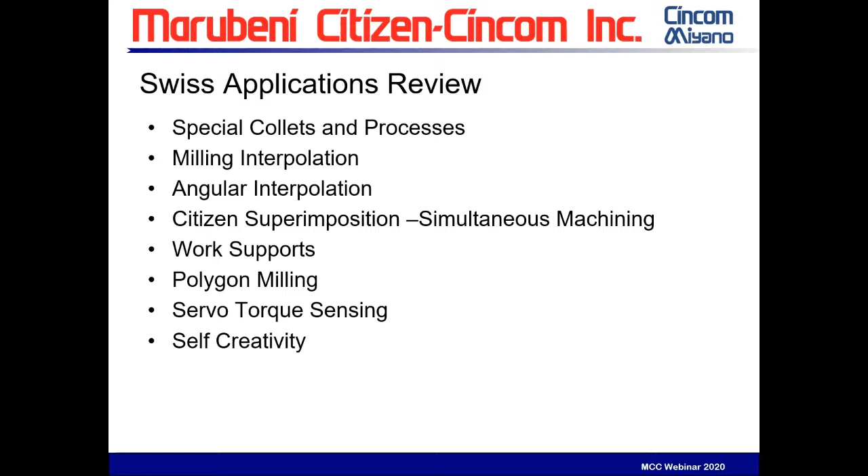As this slide loads at the beginning of this presentation, I'd like to explain a little bit of background. I'm dating myself and us, but many years ago we were asked to put together an advanced applications presentation, and you could look at it many different ways. Deep programming, deep macro things, and really advanced applications is not just the G code of the programming of how to get there. It's more so the idea of what you want to do.

An interesting statement that makes this a very powerful presentation for me, and hopefully for you, is we gave a presentation up in Productivity, Minnesota, our dealer in Minnesota. It went over well, and it was basically this presentation. This has a little bit more and a little bit less, and it's been changed over the years, but it's basically the same presentation. And all went well.

I visited some customers in Nebraska maybe 8 months later, and the shop owner actually said, 'Hey, great to see you. Thanks so much for training our staff. When they came back from your training, we saw a 15% improvement of parts going through the shop within 2 weeks of them coming back.'

And we talked and explained, 'Hey, that's fantastic. That's great to hear. But I didn't do any training in Nebraska. So whoever should get the credit, I want to spread the credit. And it wasn't me.' And they said, 'Well, they came up to Productivity and they saw a 2-hour event that really is a lecture, a presentation. After they saw this event, they went back to their shop and maybe they didn't even do some of these things, maybe they did, but it gave them a new perspective, a way to look at what are we doing and what might we do.'

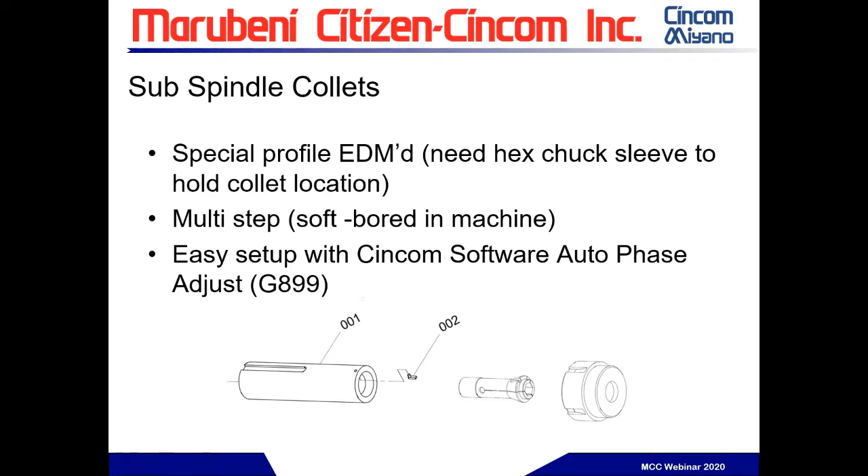So it's called phasing or phase 0. We have easy methods with our Cincom control to do that, where others have to fight and change parameters to find their zero location.

Let's look at one of these. Here's a part we had to do a long time ago. As you can see, it looks very tool-like, like a 3/8 ratchet for the auto industry or tools industry. This design was high carbon steel, and it had to be heat treated. We really needed cycle time for high production.

We could not take the standard Swiss approach of mill, index, mill, index, mill. We had to pound this through. So we knew the only way to get the cycle time down was to use a very large set of saws, and we straddle sawed. We have two saws with spacers, and we just pound across this, index once, and come across again.

We have two sides to do this on, so we're trying to figure out where we're going to hold this. We elected to say that this is the guide bushing side, or the front side of the part, and this would be the back. But now if you were to hold and make a collet to hold this, it's odd - in one direction it will hold very rigid, but in the other direction it's going to want to tip or tilt as we put pressure on it.

So really simple - instead of just ordering this collet real quick, think about it a little. We did a counter bore in the collet also, and now when the part fits, we don't only have it held by the flat, we have that little bit of the turned portion held too. We were actually able to pound these saws, and this part was something like 52 seconds. We were under a minute, and that was our goal, and we hit it. This was the first good start of advanced applications - look at your collets and make sure you design them to the best of the cutting principles you're going to use.

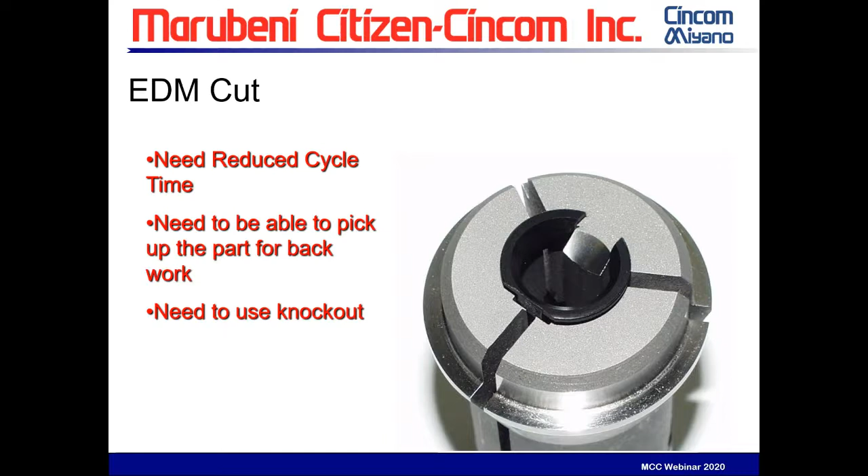Then when we were all done, it was kind of an afterthought - you don't always think of these things, but a reminder to you, somehow you've got to knock the thing out. So it probably took us another hour or two to whittle out a knockout device. Now you can see the knockout is relieved for the edge of the collet, and here the part comes out. Beautiful part, beautiful concept, and yes, we did get the order. Our competitor ran parts that weren't perfect, with little burrs. We waited our week and ran a good part.

So, creative ideas in collets. And then for the ones I think we've all seen - some of the specials and just special shapes. Here's a special shape collet. Remember how easy this is - if we run this part in our spindle and stop, manually bring this collet over the part and execute this G code, or on today's machines, push a button in preparation, this location is known, and now we have a very easy way to pick up this part too, through strong Citizen-Cincom software.

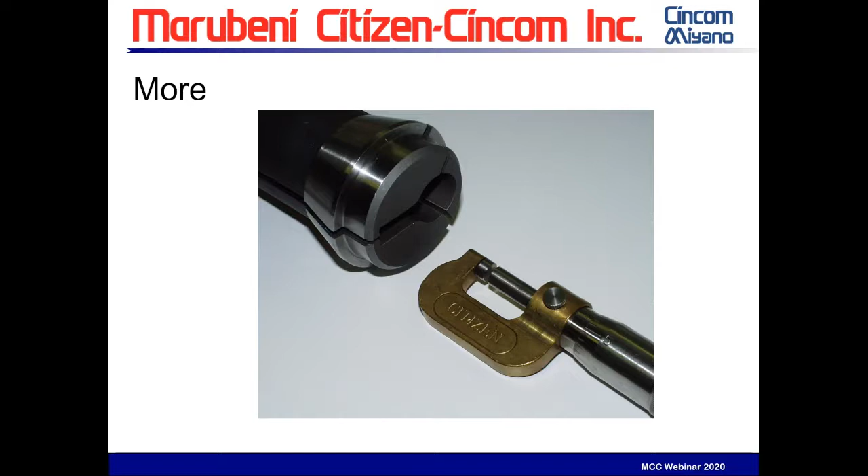One more simple example in the Swiss world, less used, is the half hard or soft collets that you can bore yourself. These are critical for quick running parts. If you're going to run production, you should have somebody make it hard. But here's a 3/16 stainless part that any time we tried to machine it, it acted like a bell and vibrated. So we made our collet with 2 diameters, hitting here and here, and it picked up perfectly, ran all day, all week, all month. It was a beautiful setup. So simple things with collets.

Now let's look at the next level of collet. Here's a part we did - I whittled this out for a show at IMTS, I think 2008. We instantly got 2 or 3 machine orders after this. Actually last week our support manager reviewed a project where the customer has a part that looks almost exactly like this - different, but similar. Everybody wants to do eccentric turning, eccentric threading, eccentric everything, and that adds cycle time and use of the machine. The machinery is really moving all over the place.

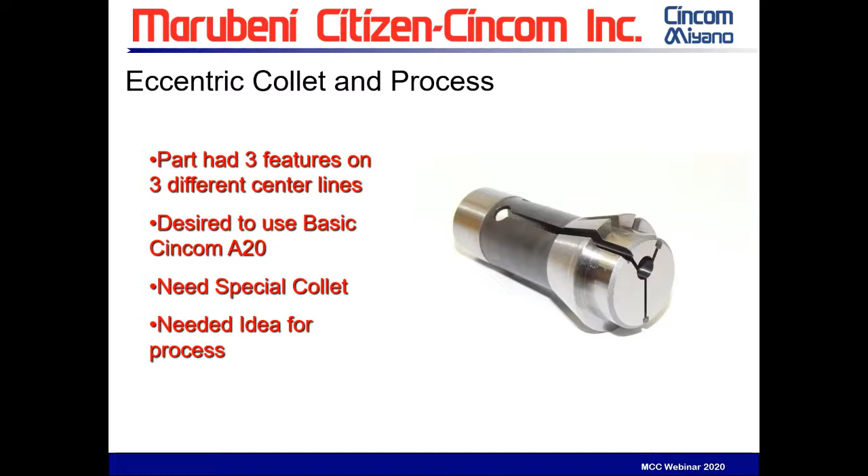If we look at it, we have a collet made - Southwick was our friend here, and they made this. Of course we have the slot for the chuck sleeve again, so it's an eccentric collet. Now the problem is, how are you going to pick this up? We can't spin this. So this is the part of creativity. There's the part installed in the collet.

Again, but now we've learned a lot, and we know when we do special stuff like this, we have to also figure out how to eject it. For some of you that don't know, this is what we call a standard option - it's an option, but all our machines have it and it's available. It's a spring-loaded knockout device really designed for parts with holes in them so the chips don't go through - it's called a through-hole workpiece knockout device. If we change the end to be an eccentric knockout, it lines up right with the eccentric. Piece of cake, easy to make, and the ejection for this part was easy.

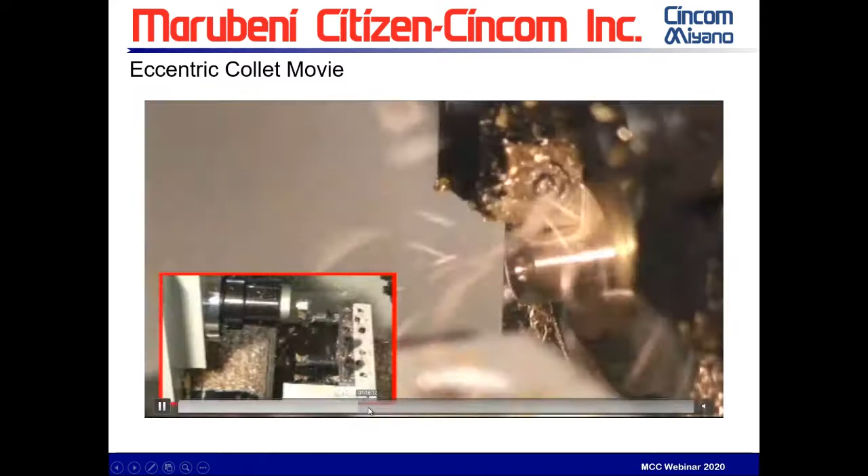Now here we're going to look at the application - I'm not going to run the whole video, we're going to jump forward to the start. It happens to be brass, but here you can see we already have it picked up and the part is running in its eccentric. So as the front's running, the back's running. Now we have plenty of time - there's a lot to take off with this eccentric. I'm just going to jump ahead and get to the good stuff.

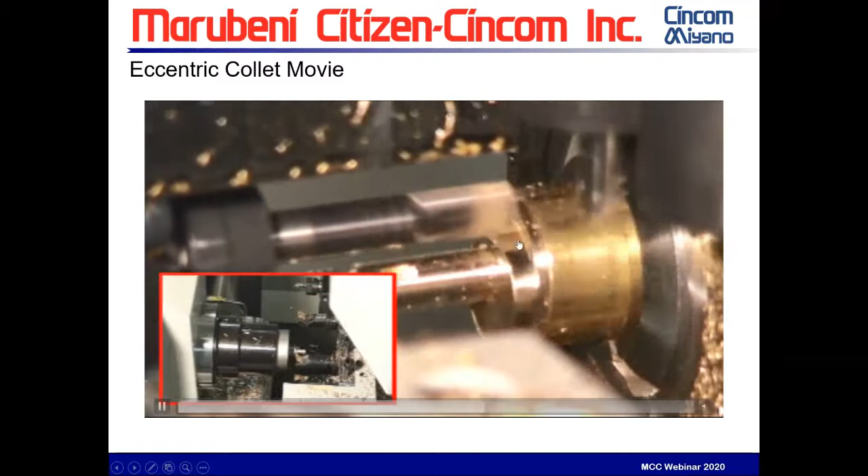This would be the 2nd center line. So the first part we're running on normal center. We're milling the 2nd center line with milling interpolation, which we'll cover in a minute. Then we go and finish the rest of the part. What's interesting is how are we going to pick this up? This is on center, and if you remember, the collet is offset, so we can't spin this.

Well, try to think outside the box. Just how can we get this part? We do have an x-axis on our subspindle, so if I can stop this properly, here's what we're going to do - again this is on center. We're going to pre-cut off to a number that you determine - might be 80 thousandths, might be 60 thousandths - enough that's going to hold the part here, but it's almost ready to fall off.

What we can't see on the left here is the subspindle collet. If we stop and lock the C-axis and bring it in line with the X-axis, and now bring that off-center collet on center, but not spinning, we feed it over the part. Then all we do is close the collet, turn on the spindle, and we'll actually just twist the part off. I'm going to run it now so you can see.

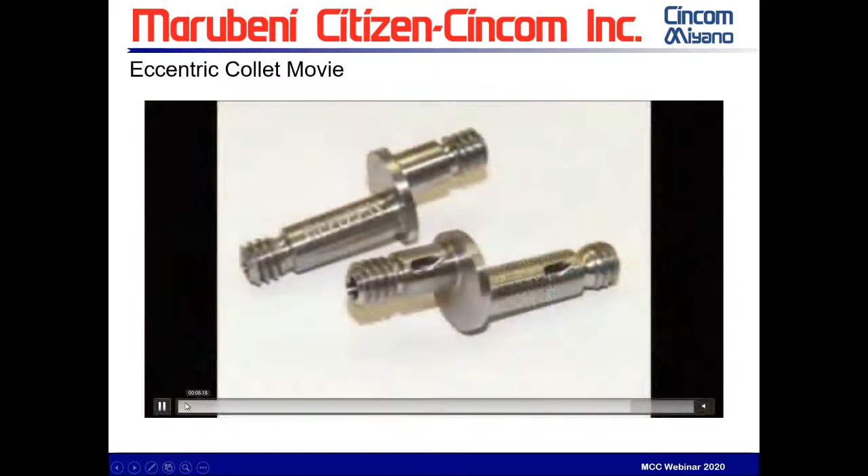So in this case, we pre-cut off, then just twist the part off. Now we have the part held, and we have the ability to go machine the second side, turning and threading and grooving, without needing eccentric turning. Very simple thing, thinking outside the box.

If we look at even our fixed head versions, our Miyanos, our BNJ, our BNA series, MSY, anything where the subspindle moves in X, we can do this same thing, and we do it. So let's look at one more.

Here's another project we had that's a creative part. It's in the medical field. It happened to be a toe implant. We made it very large for a show and changed it around, so it's kind of like a horse toe implant. But just as an example, what this has is a bend to the part. So from the center line of this feature to the center line of this other feature is a 6-degree bend.

Again, this customer's concept was, I don't want your high-end machine, I need to run a lot of these for the best value. So we looked at the A20. Now you're starting to get the idea.

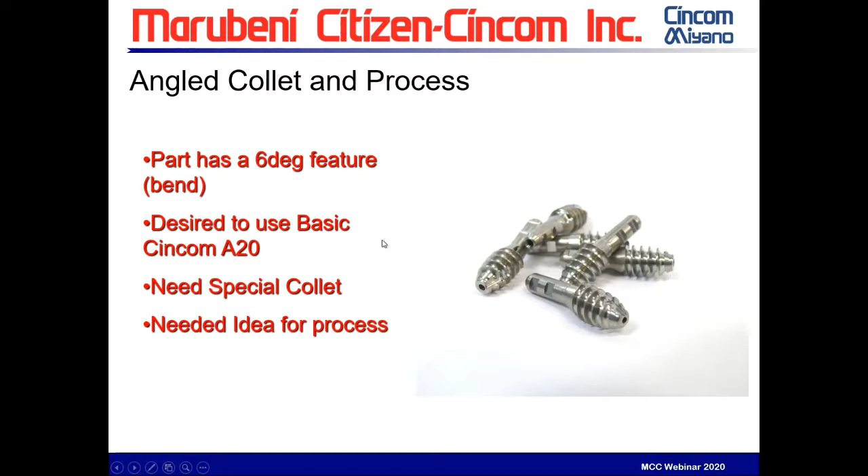Let's just throw a collet in there. But wait a minute, this is angled. So are we going to bend this? The first thing we do is this bore is not a bore - it's going to be like a sinker EDM, and I'll go drastic here - but this bore is cut at the 6-degree angle.

Now, how are we going to get this part in there at a 6-degree angle? Are we going to mill it? Well, now we've lost all our cycle time. So we need a good idea, open mind, and be thinking. Get creative, and we'll get this going here.

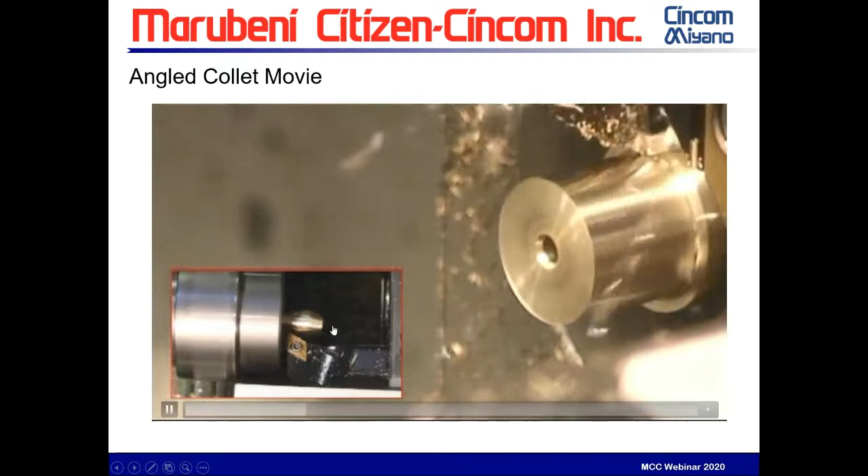Here the back is running from the 6-degree angle, and it's taking its time to turn. The front's just working away. Let's get this going here. So, thinking outside the box like we always want to do, let's watch this process.

As we complete the front of the part, we do that pre-cutoff. But after the pre-cutoff, we're actually going to bend the part. Now, once that part is bent - if you saw it - after the part was bent, we rotated it 90 degrees so it's in line with the subspindle X-axis.

And now we can take our collet that is already at that 6-degree bore, and we'll have to enter our subspindle in X and Z at a 6-degree angle. We're going to close the collet, rip it off, and go machine. If you saw it move a little, what's interesting is it's going to pull it to the collet. So as much as you saw it move a little, it repeats very, very well - I can't say perfectly, but very, very well.

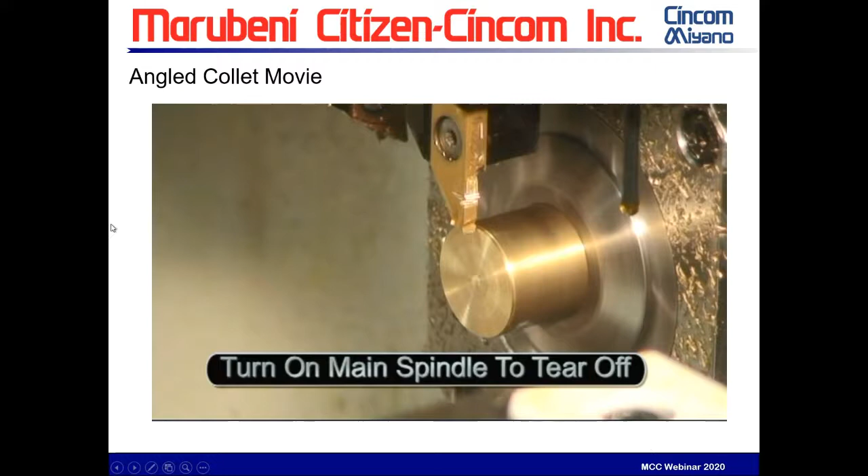We had a customer have a similar project after seeing some of this locally in Illinois - different part, but similar - and they ran to a very tight tolerance, and they were able to do it. So often it's just the idea to see it. Some people just hadn't thought that this was possible - picking up an angled part and having a bent part in the machine.

So that's a review of collets. Hopefully it opens your mind to some of these techniques. Now we're going to go into some other techniques, milling interpolation. I believe most of you have seen or heard of this, so I'm going to do a quick overview.

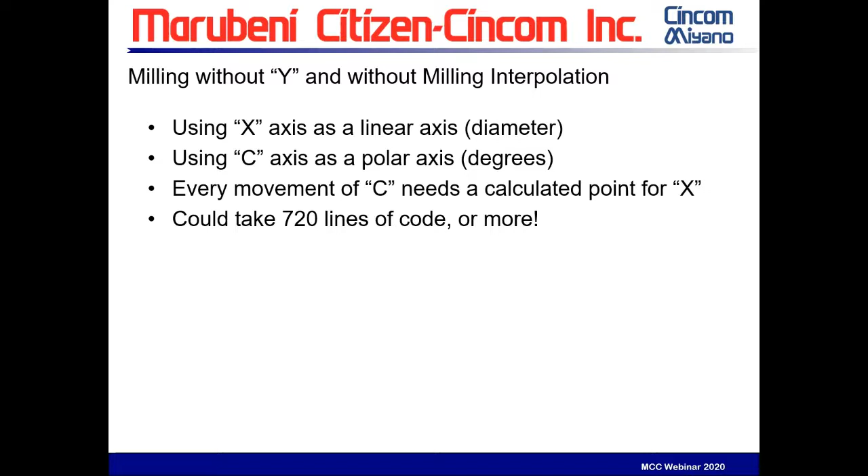Basically, we have an X-axis and we have a C-axis, and it's difficult to program in the polar world. So when we have a real axis X and a real axis C, and we want to do blended moves, it's all math. Our high school training is our friend - pi times diameter gives us the circumference and we come up with numbers. Kind of difficult. Many years ago, we used to have to do this - we would have 720 lines of code for this little shape we're doing.

Then it's awful, and you want cutter compensation, so you have to reprogram the code.

With milling interpolation, a function we've had standard in machines since the 90s, we make a virtual axis. We do a G code and it turns this function into pretending we're on a milling machine. We program a virtual axis up and down as if it's not on the Swiss lathe, and we program the mill going around. In reality, it does C-axis and X-axis moves, and we're able to get complex shapes in an easy to program method.

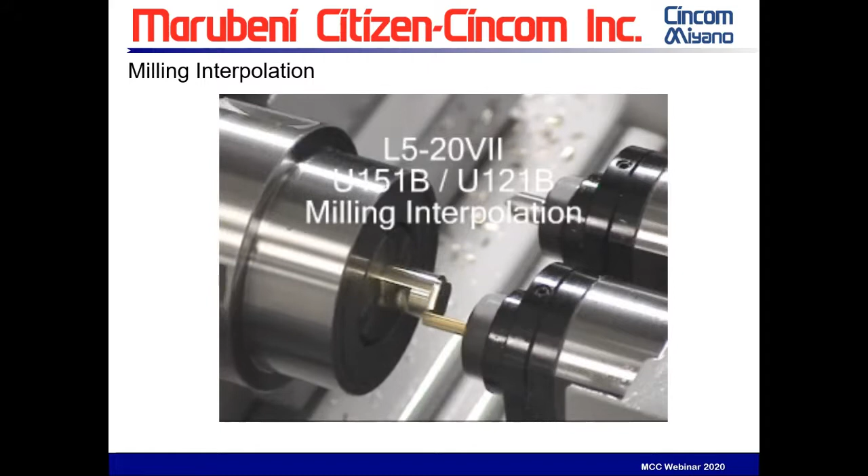This is more common today, so I'll go quicker. But basically, for those new to this, if we just take a G code and call it to turn this function on, from there we're programming in the real world of X and Y, just as if we were on a milling machine. So you just saw a square being cut. Here's an X150 and a Y150 and an X150 and a Y. Very straightforward programming - maybe 6-8 lines of code where, 20 years ago, this would have to be 720 lines of code. So milling interpolation is our friend. It's a great way, if you don't have a Y-axis, to get some shapes going. Basically all you need is a C-axis and a live face tool, and we can do milling interpolation.

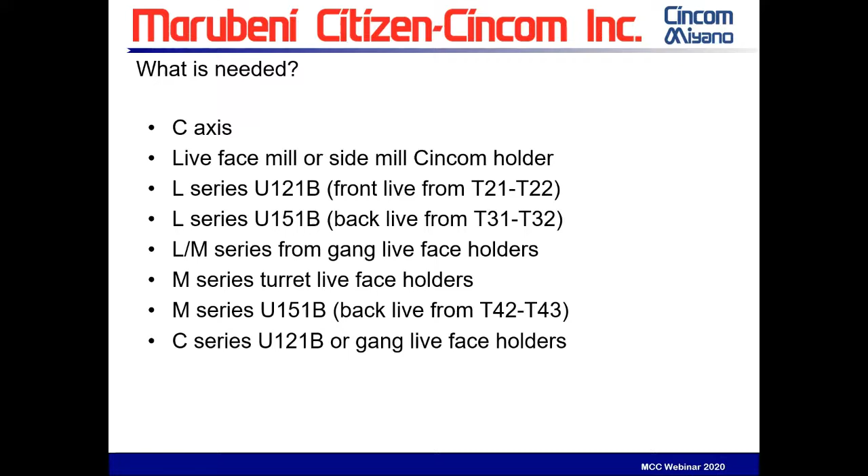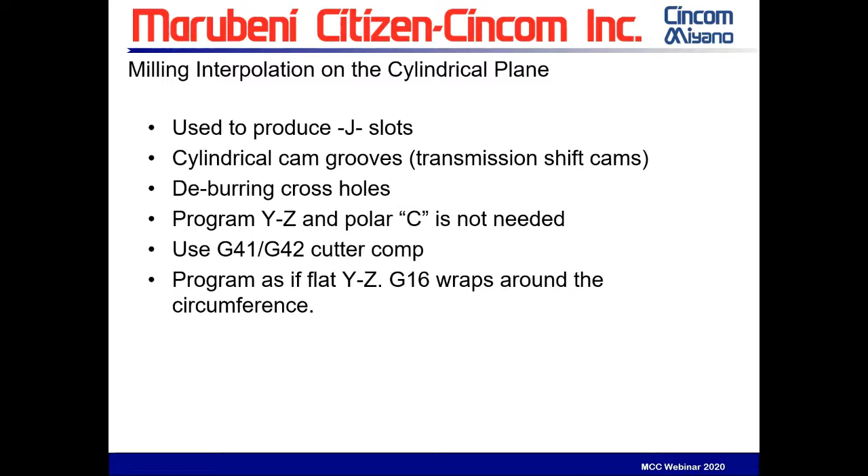But what's more interesting, added on to milling interpolation, is another plane called the cylindrical plane. A lot of our customers and users maybe know about it, but a lot don't. This really opens eyes for operators and programmers that simply have a cross hole. When we chamfer a cross hole, there's always a very large side of the chamfer and a little short side, because we're plunging in X and there's a cylinder. So we can basically evenly chamfer all the way around the part utilizing the cylindrical plane. And often our customers have some kind of J slot or cylindrical cam grooves.

I always say a video and a picture does a thousand words, so let's look at this one. In this case just simulation, but here's a simple cam groove - I think we've all seen them, some of us have machined them. But when we run something like this, it could be a tight tolerance.

If we start sharpening our end mill and putting in different end mills, we don't want to reprogram. So all of this will work with tool nose radius compensation, and we just change an offset for the radius value. Very easy to program, very easy to utilize. There's an even chamfer all the way around the cross hole. Many people would say, boy, that looks like it's probably really hard to program.

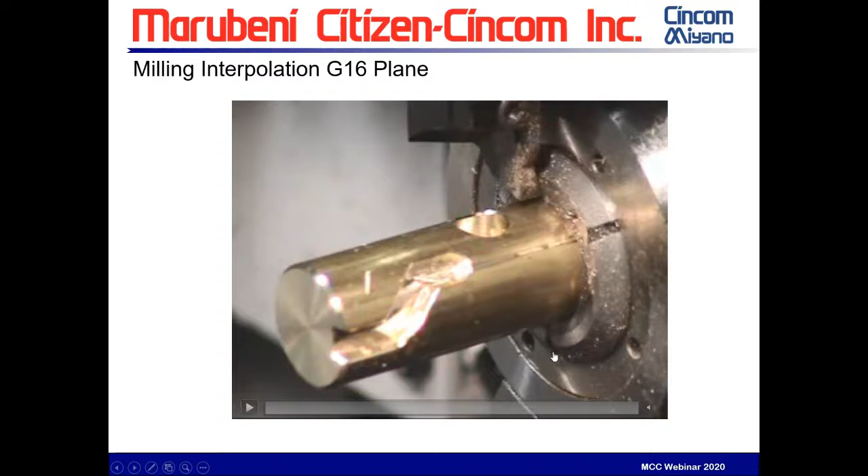Again, we're not here to teach you programming, but if we could take that cylinder - let me go back - if we could take this circle, the part, and put a line through it and magically unwrap it, unwind it, and make it flat, which would be pi times diameter, that would give us the circumference of the circle. If we did that and put it on a piece of paper, here's the flat paper, here's our cam slot that we just did, our cam groove. And we simply program pretending it's a milling machine, and come to - if the center of this is Y0 - I'll go to the next slide here.

We can simply program point to point: G1, G2, G1, G2. Let's look for a second - here's this milling interpolation code, here's this new cylindrical command. Now it's simple programming - I can take the code from here and program it. Y, comma C. This is a 30 thousandths chamfer. Z 375 - see the 375 here? And we have a comma R to put in this radius.

So point-to-point programming with cutter comp. We used a 125 end mill - maybe it was 123, maybe it was 126 - we can just change the offset to get the slot.

Then if we look at that, at the end of that video was a chamfering of a cross hole. Basically center the tool, call up the cylindrical, feed the cutter to touch, do one circle of circle programming, the G2, and get out of there. So really one line of code. Again, many years ago I would do that chamfer with 720 lines of code, 360 lines of code. Here's really one line of code.

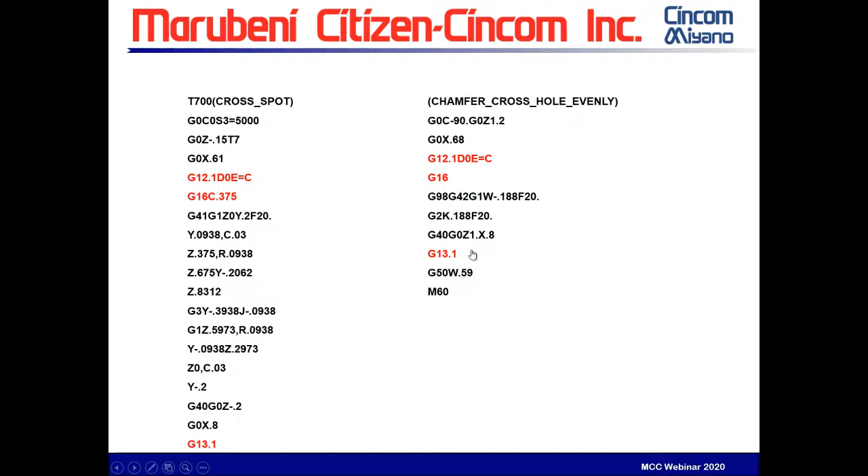In the G16 C.375, what is the C.375 related to? This is just like we have to do pi times diameter so we can figure out how to do the math. This is a radial representation of the diameter. That part you saw running was .750 bar stock, so this example would be half of that. It's the radial value describing where it's going to do the math for all these shapes. It's that simple - it's the diameter at which it's working.

Another question is, could you do this with any material? Definitely any material, sure. It's just programming code.

Are these program software features like milling interpolation standard on the Cincom machines? Milling interpolation is standard on our Fanucs and our Mitsubishis for many years. Cylindrical interpolation, the cylindrical plane, is standard on our Mitsubishi machines almost forever, back to the L5, which is in the 1990s somewhere in there. On our Fanuc A20, there's still an option for the cylindrical plane. So 90% to 95% of our machines, it's all standard. A couple machines have it as a small option.

So I will continue. Thank you for the questions. By all means, keep putting them in, and Joe, keep popping them up.

We're going to move on to another feature that a lot of people hear about and don't really know. A lot of people want to do angled cross holes, but then we get a lot of parts that come with angled surfaces, angled features. It's not surfacing with a ball nose end mill, but a feature that's at an angle. And if we don't have codes to help us, we have to program 3 and 4 axes simultaneously. I think you and I know that you and I are not going to do this - this is CAD system, CAM system.

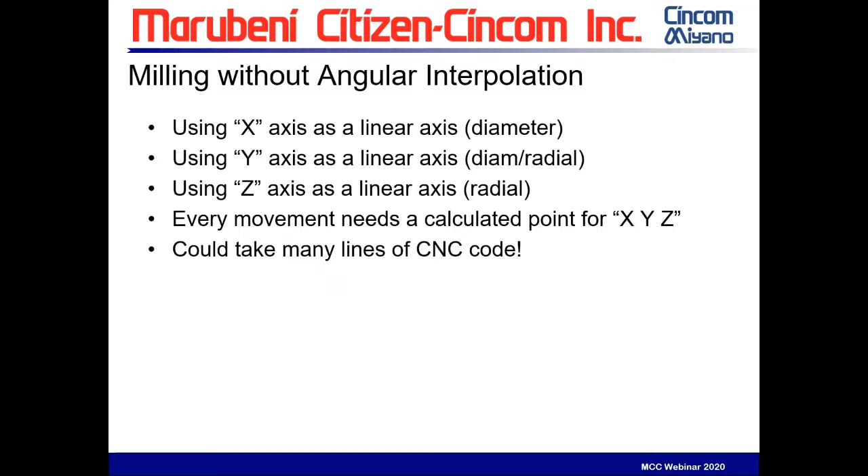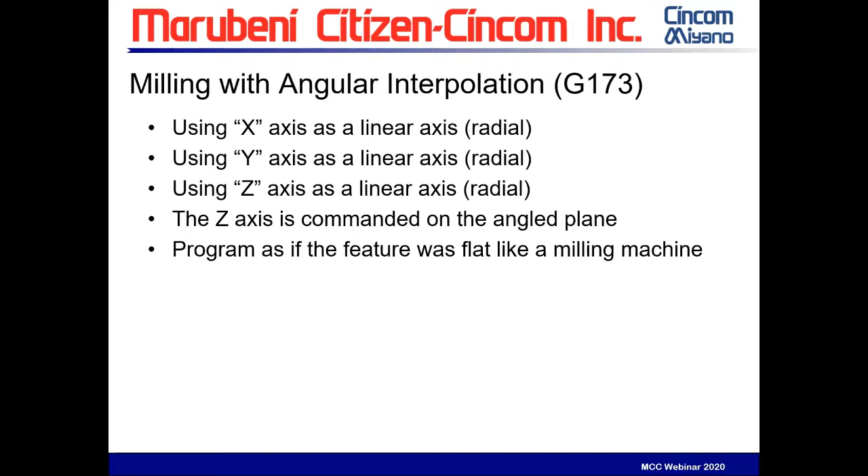Because we have tools that come in at angles, and a lot of our machines have standard the ability to do an adjusted angle holder, we now, and for many years, have a G code that makes angular interpolation. This, again like milling interpolation, will make a virtual set of axes. Basically, to keep it simplest, we can pretend we're on a milling machine and not at an angle on this CNC lathe, on this Swiss lathe. A video probably explains it the best.

We have it at the beginning of the part, so you at least have a picture of the part here. So here we have a part that we did a long time ago - that's big stainless, it's 1 1/4 inch stainless, and it has 2 angled fittings coming off of it. So quite complex. This specific machine happens to be an M - doesn't matter.

So as we start machining the part, after we created the basic shape, we have multiple tools coming in from our turret with angled turret - fixed angle, not a programmable angle. So this tool is set at an angle.

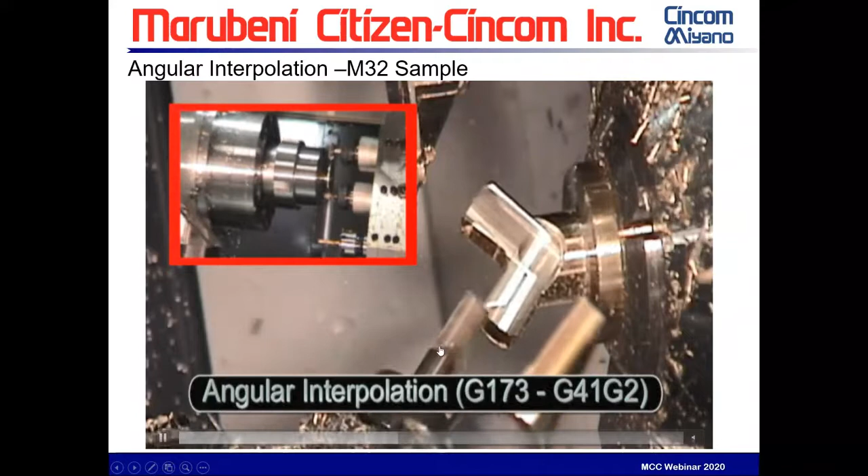If you could start to imagine, we have an x-axis, a y-axis as it's milling, and a z-axis. This is all code, lots of numbers. When we utilize this function, angular interpolation, we can pretend that we don't have all of this and we're on a milling machine. Z is the tool - the Z goes down the center line of the tool.

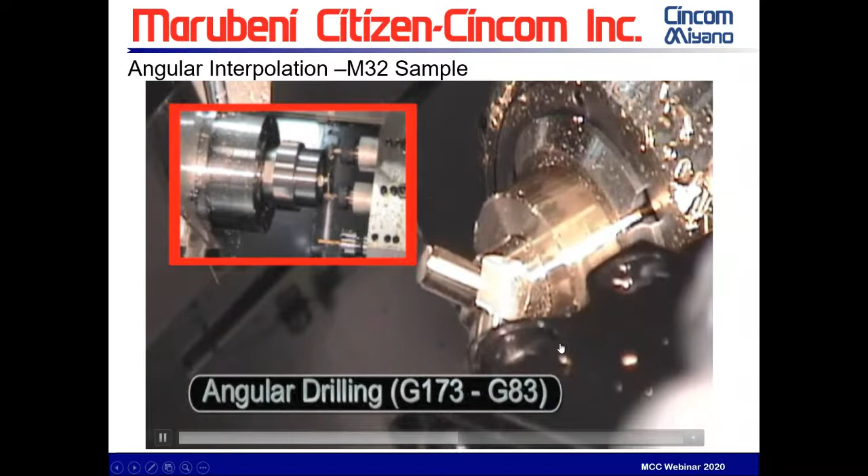If we continue to watch here for a second, look at all this path. Here we are milling these shapes, and probably the most creative one that people like to see is thread milling. But here a lot of our customers do peck drill. When you don't have these codes, you have a lot of angle, X and Z, X and Z, X and Z. In this case, we're just doing G83 - we're going to peck drill G83 just like you would on a face drill.

And if I jump this ahead, here's a thread mill coming in. And of course, not only are we doing a circle, but we have to come out at a perfect pitch, and we have to hold a perfect diameter. So we need tool nose radius compensation and offset 1/10 and 2/10.

So this looks great. How hard is it to program? Well, it's pretending you're on a milling machine, and it's not hard to program.

So if we take the quick look, let me see if I can get past this. We call up a tool, and I highlighted this G code that says we are now going to create a virtual world and do a rotated plane at a 45-degree plane. We have to get to the center of our tool here, but now we pretend we're on a milling machine. The Z is the tool length, it comes into a length.

We do cutter comp on, we do a quarter rotation. This would be your logic for thread milling. Everybody might have their own method, or each cutting manufacturer might suggest something. This specific one is a simple quarter radius in, now that it's engaged, a full circle, and then a quarter radius out.

Now Brian, we have a question here, sorry. Okay, G16, can it be used to chamfer inside cross holes? Looks like the tool may break due to C-axis movement.

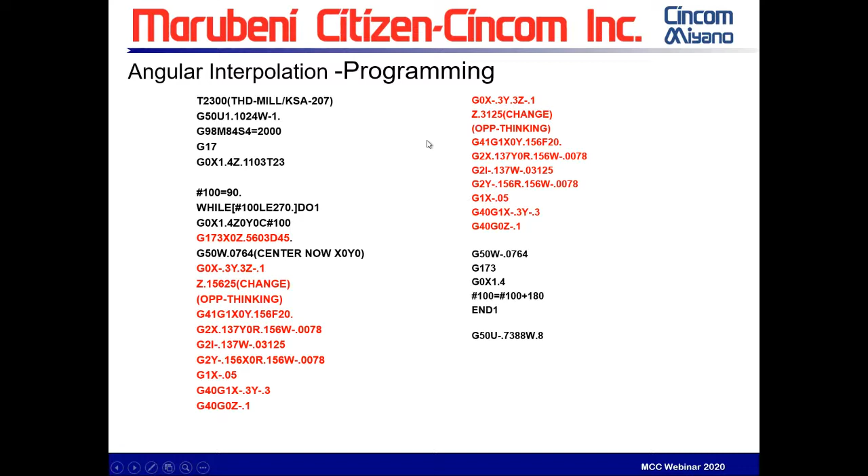Okay, so I'm going to continue with the angular. The point is that Z is the tool and it's easy programming. So again, trying to think outside the box. We have so many people say, well, I have that fancy M with all these angle tools, but I don't have that fancy M machine. So therefore, I don't really think I need angle stuff.

Well, here's a part that we were given, it's actually a sight for the military. And the feature is, there's an angled feature with an angled hole. This hole is not straight in, and 90 degrees opposed to that, perpendicular, is a slot. So there's two angled features, which means multiple angle tools and B-axis stuff, it starts getting expensive, but we wanted to think outside the box.

And if I look at our L series for many years, we have tool holders that we can mount in, that can hold tools at 90 degrees or all the way around to 0 degrees, or anywhere in between. So we have adjustable tool blocks on our L series for many years, and we still do today. But we need two separate angles.

And so Citizen didn't design this for us, it's not for this, but I did maybe the wrong thing, anything to be creative. This block can also hold a tool that's a face tool or a cross tool, and that's designed to be at 90 degrees. So you have 90 or face, and we can utilize that. So what we did was we rotated that at 30 degrees, and now we have the two features we need. Simple, think outside the box. It can't work for every part, but it did work for this part.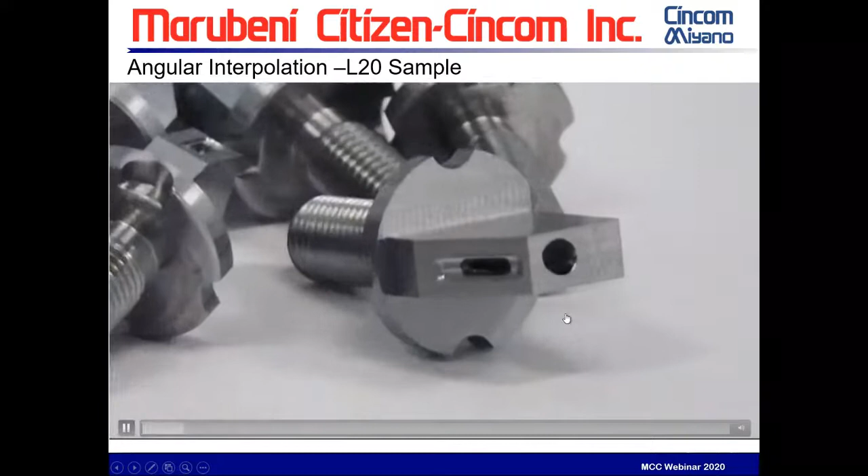Let's take a look. And so if we look at this feature, there's an angled hole, you'll see in a minute, and perpendicular to it, a slot, and a little keyway slot.

And so I can skip the beginning here, we're whittling away the beginning of a part. Oop, that's too fast, too much. So we created the surface of the part. And now, utilizing our G173 angular interpolation, we can peck drill a hole. There's our creative use of the holder.

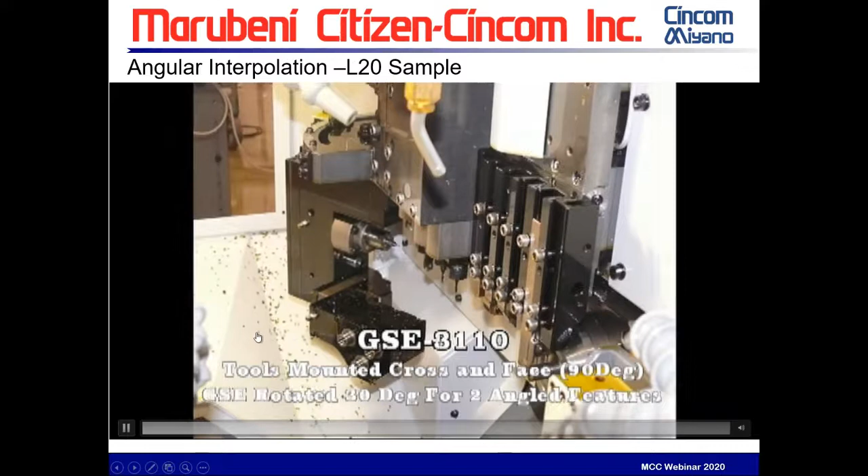Now we can go, and when we make our adjustment, we typically wouldn't just do this. We'd put an indicator on the side and make sure we have a perfect adjustment. After that cross hole, now we come in, and this programming is X and Y, simple Z. So we're on this virtual plane, very easy to program, very easy to offset.

And when that's done, we always make little burrs, right? So come in and deburr, come in and deburr. So angular interpolation, not just for cross holes, many, many different things. So I'm going to move on to many subjects here.

Superimposition - I would say the Cincom control and superimposition go together. This is the backbone of Citizen-Cincom. But still a lot of people today don't utilize all of our features, and we want to make you aware of them. It's simply superimposition: one axis to follow or mirror another axis, but still be fully programmable and move independently. You can even have 2 or 3 axes multiple superimposed - a pretty neat feature. We're going to show you this.

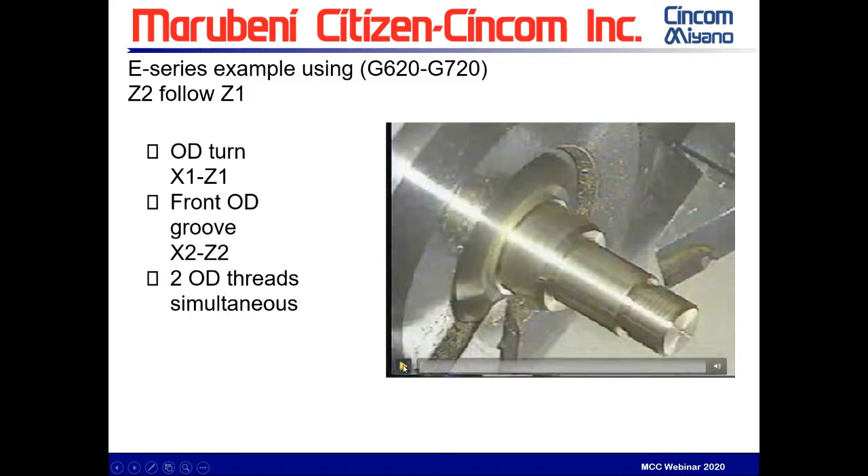This function actually holds in rapid motion, and it's easy to program. Now take it back - I left my old slides in here because they're key. We had and utilized this technology since 1990. So some of you old timers out there, some of our sales that are watching, and even new customers - this is your first time. This is an old E32 from 1989, and this is a superimposed set of cutting where we're turning and grooving simultaneously.

But then a lot of people see us at the shows today and we're doing 2 threads simultaneously, like 'holy cow, look at that new technology.' We've been doing this since 1990, 2 threads simultaneously. So superimposition, many things we can do. It's not absolutely for everything, but many things we can do.

And the next part about this presentation is keeping an open mind - people tend to lock into what they see. They have seen superimpose for drilling and turning, or they've seen superimpose for turning and turning. So some people just can't get it in their head that superimpose is not turning. Superimpose is one axis to follow another axis.

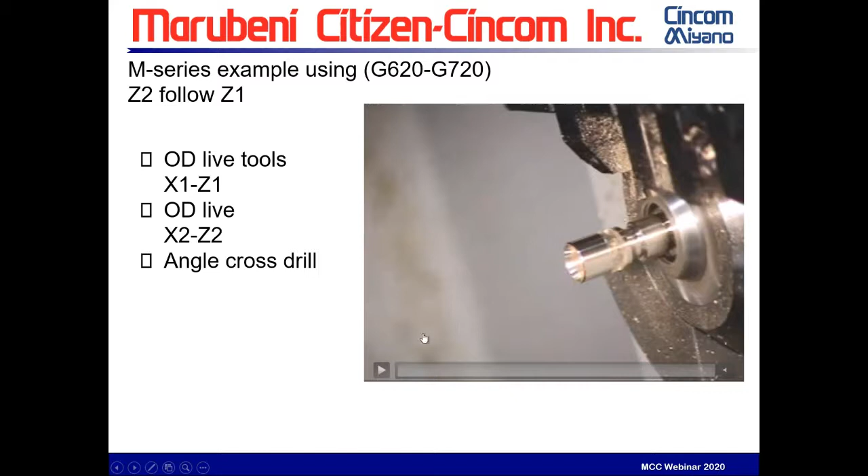It's anything - supports, milling. In this example, we had a customer that challenged us: if you could run this part faster than the Tornos Deco, we're going to buy machines. And this customer today has 150 Cincoms. So we beat the Tornos time. How do we do it? Let's utilize every piece of the machine that we can and use superimposition to get multiple features simultaneously.

So here's the indexing, let us do it. These holes are multiple, and here's angled cross hole while we do cross hole. Great, simple little thing. But let's go to the next.

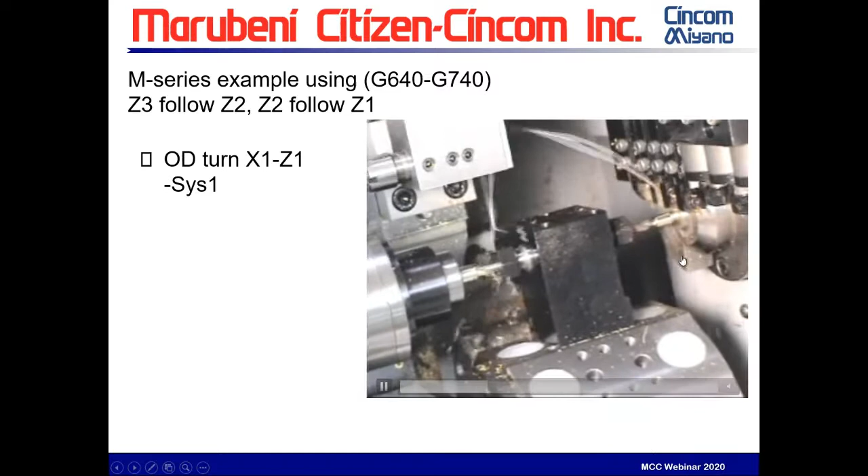Again, this goes back for some time. This happens to be an M series. We have M today, C series, and we have many that can do this, our D series today. So here's multi-axis superimposition. As we're turning, we're spotting and drilling and pecking, indexing the turret while it's spotting and drilling on the back - utilizing all of the axis as much as we can, 3 tools in the cut.

Now, can we do this on every job? No, but we can do it on a lot of jobs. And I think a lot of people get into the mindset of 'yeah, but that's hard to program.' It really is not. You have to get past the thought of difficult - it's almost as simple as adding one G code. We have another example towards the end of this that we're going to show you some of that. So multi-axis superimposition, fantastic Cincom technology.

So here's a part I'm going to kind of fly through that we were challenged with - we're a member of the PMPA, and they had asked us to do seminars on cycle time reduction. And I brought up the point of superimposition. So there's another portion of superimposition many people don't know, and it's called superimposed spindles.

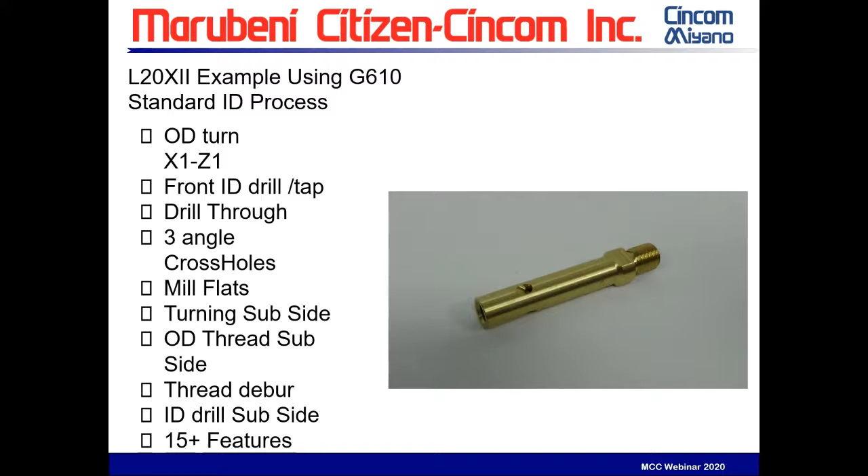So we're going to look at that part you just saw. And if we look at what everybody does the normal way - I didn't have it in video, so I made a little Esprit thing here - but if we're going to drill a part, we typically center drill, stop everything, and tap. So this is a very normal process for Swiss.

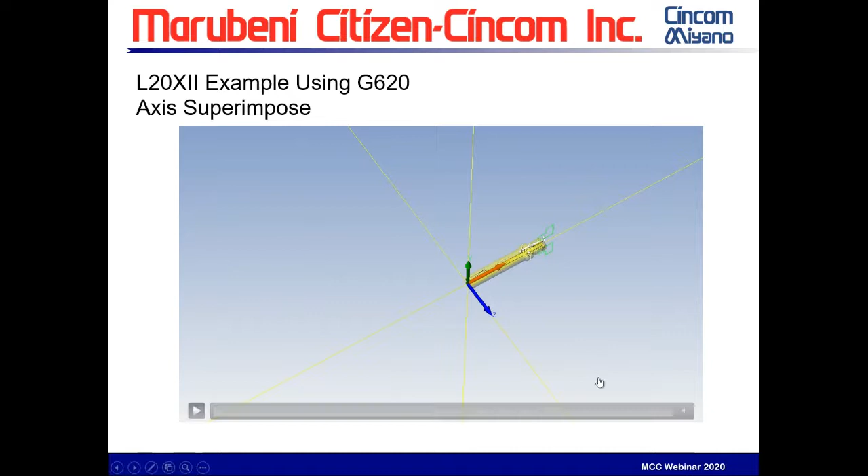Then we go on and turn. This is how we live, this is Swiss. Now, we just learned superimpose, right? So as we're learning, you say 'well Brian, we definitely can probably get that hole simultaneously.' So if we were to do what most of us might start thinking just from this presentation - well, as I'm turning, I can spot and drill. But think about it for a second.

If I have to tap this, I cannot be spinning. So I'm going to have to spot and drill as I'm turning. And sooner or later, I have to stop the spindle, bring the tap over, bring it in, reverse the spindle, bring it out, right? This would be normal tapping, and really the only way to tap.

Well, I'm going to challenge you and say, watch what we can do. And I want to say we could do it for many years. This is not new for us. Not all of our machines have it as standard, but as long as you have a live face tool.

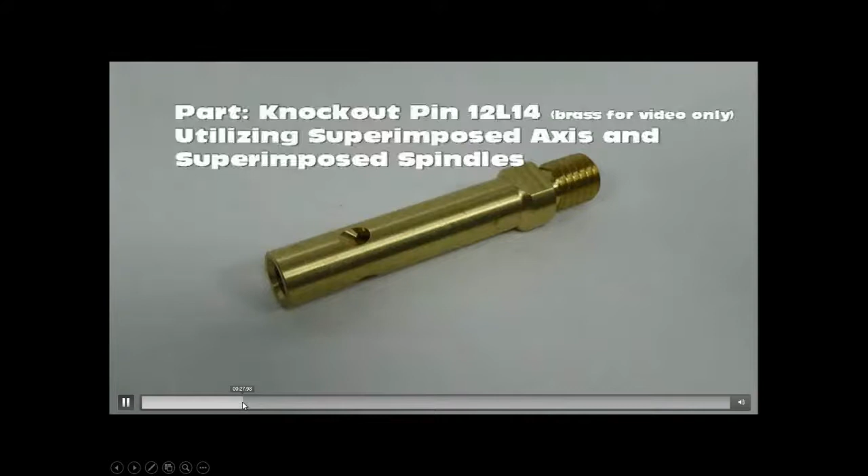So for example, today's machines, the Type 10s and the Type 12s, can all do this. So let's get through the beginning stuff. And here's a part with the million features we saw.

I'm going to stop the sound here. And so we're going to do another view closer, but you can see it was spotted. Whoa, what's that? The tap came in. Well, I'm going to blow that up for you. Whoa, went to the beginning. Sorry. Oop, back her up a little.

Here's the beginning. And so if we look at this concept, this technology, of course we can center drill, but how are we going to put that tap in there? Well, we have another feature called superimposed spindle.

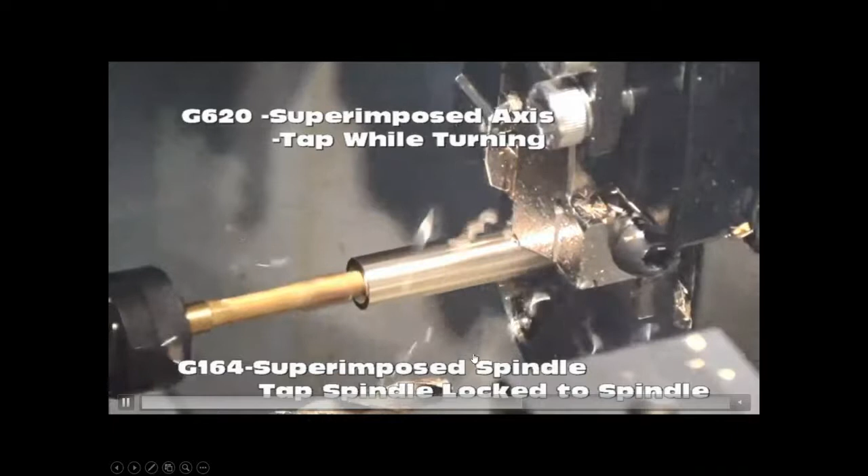So one spindle can follow a spindle, but still be programmable. We are still turning. The Z-axis is still moving. We've turned on that tap. This is a rigid tap. It is not floating. And it's a combination of the superimpose code and spindle superimpose.

And what do you save? You don't have to reverse the spindle. We get it simultaneous. We save 6 seconds, 7 seconds. You got to look at the whole part, but this actual whole part in steel, here's angular interpolation, happens to

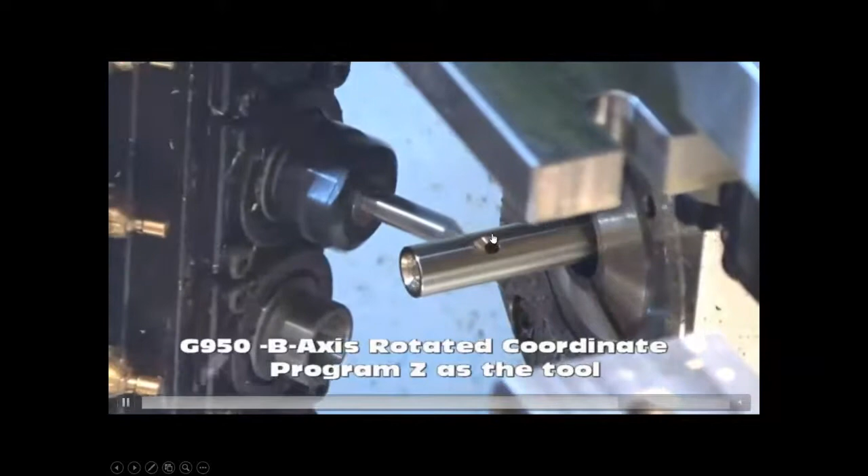be a B-axis machine. So we're adding to all the things we've already been learning. But if we look at this, boy, Brian, the way you're showing that, I'm sure that we need high-level programmers and kind of rocket scientists, and we don't have programmers like that. We're going to have a hard time.

Well, let's look at that part that we just saw. We basically turn on superimposition, and the turning tool starts running, and it's at 4,000 RPM.

But of course, there has to be some talking. We can't have the spot go in if the turn's going to face, the two tools are going to smash into each other. So as the turn goes in and does the chamfer, and it's ready to start on its long turn, we send a talking code. So that's one little thing we had to add.

From there, we turn. As we're turning, we spot, but we don't do weird stuff. We spot 110 thousandths deep, and a feed rate of 2 thou per rev. Now this one's feeding at, where are we here? We're feeding at 3 thou per rev. So it knows, it just does it. We call up a drill and do a peck drill cycle. It just does it. There's no rocket science.

And now you're going to say, well, but that tap had to be rocket science. Well, let's look at the code for the tap. Look what Citizen has given us. We say, make the tap spin at 0 RPM. That's interesting. Okay, whatever. So we have a live tool tap that's spinning at 0.

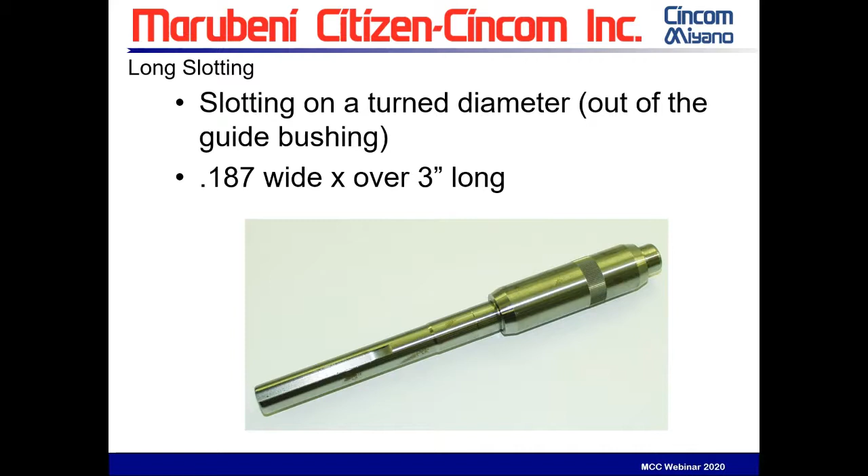Well, thinking simply outside the box—or today, a lot of people do this—let's put a support. So we turn the diameter, pull it into the guide bushing, bring in a support we make, put the part into the support, and now we put a saw in there. I think we sawed this at like 50 inches a minute. Nice and rigid, it's held. This was a two-sided machine, a two-turret machine. Simple support ideas. Let's look at another.

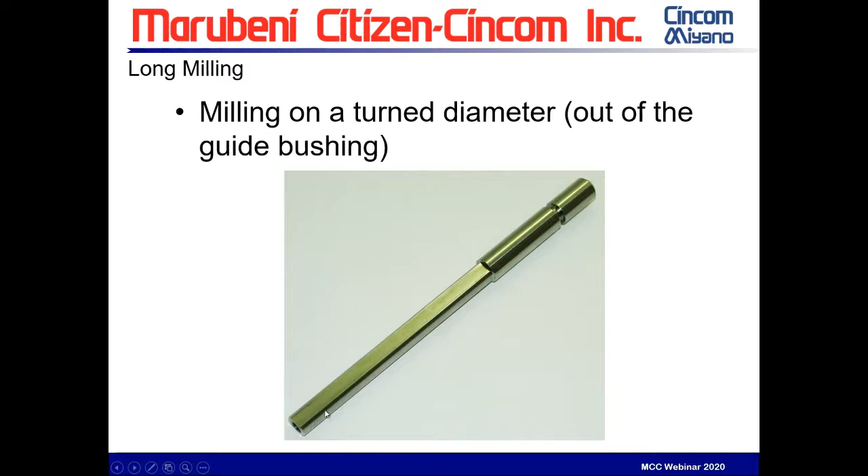There's a tap, that worked. But what I thought was going to be difficult with this milling—as long as you have it well supported, the mill does its job.

Again, we made a support. We had a window in the support so the mill could go right through. And this was as rigid or more rigid than a milling machine. It was held 360 degrees, just a fantastic method.

And the problem was the cutoff. What we did was just like those previous parts with the eccentric—we pre-cut off, stopped, and ripped the part off. And then our cutoff lasted. So many things that we can do.

Now I'm going to go into a whole other topic, and I have a creative presentation here for you. So polygon turning is desired by many, and basically it's a timing of the spindles.

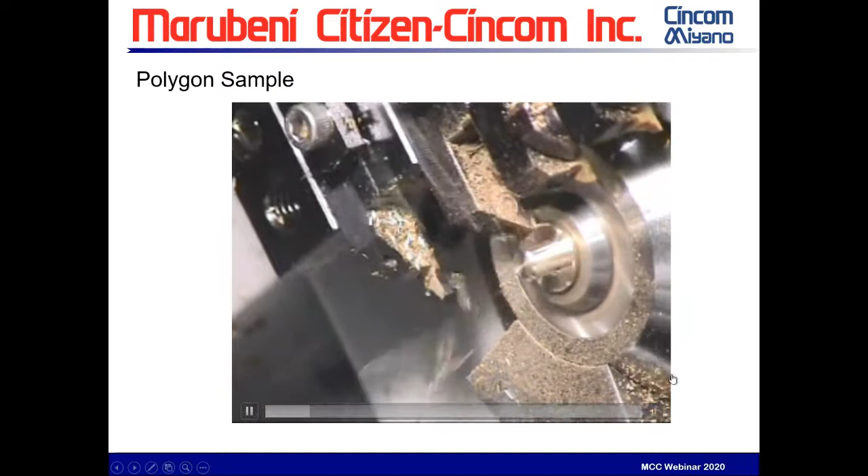So if we look at this, I leave this old video in because it shows the process the best. This happens to be M-Series. M-Series, we actually sell a holder, and there's some cost to that, but we can program multiple diameters and we have flats, and everybody wants to do flats. What people don't understand is how aggressive this is.

So if I turn the volume up... I purposely wanted to give you that. So it's a very aggressive feature, but this shows the concept.

It's a timing of the main spindle, a timing of the live spindle, and you get a near flat surface. It cannot be truly flat. Well, how flat or how not flat is it? And when can I polygon?

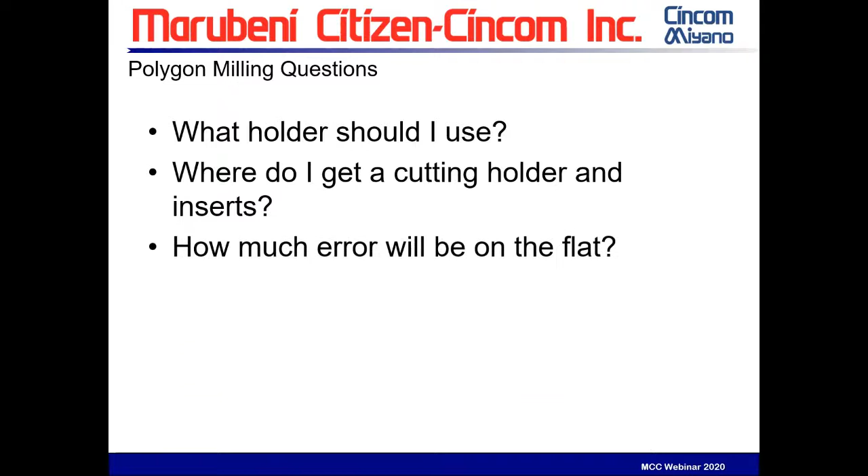So many of our customers and many of our dealers would say, Brian, what holder can I use? Where do I buy it? Where do I get the cutting tools for it and the inserts? And then how much error will be on the flat? Many years ago I didn't have all these answers, and if I asked around, it didn't seem like anybody had all of the answers.

So if we go to our higher end machines, yes, we have turrets and we have holders, but what if I don't have a high end machine? What if I want to do it on a simple L machine? Basically, any machine that has a face live tool can polygon.

Where do I get cutter holders? The big companies—Schwanog, Horn, and others—they sell big cutting holders, but big cutting holders don't fit in Swiss machines. So I'm going to say here, you might have to design your own.

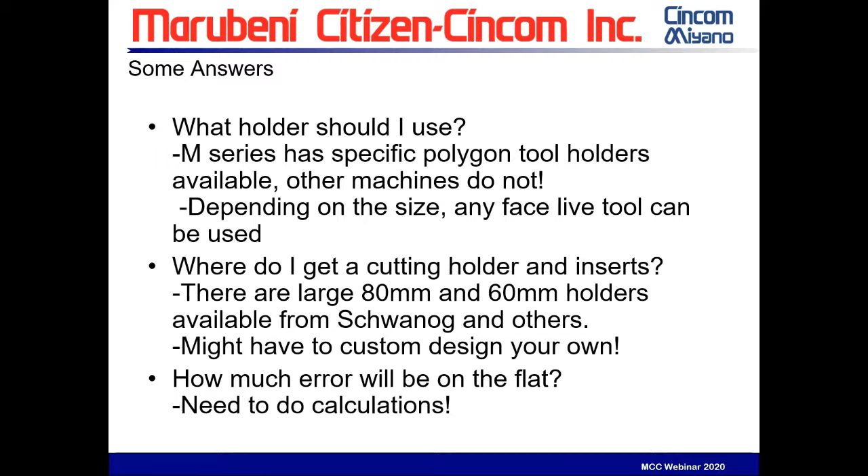How much error will be on the flat? I still cannot find calculations for this, so I'm going to show you what I did. Here's an example of a part that we had—it's a great success story. We were given this part, it's a 70 thousandths square, and on this square shape it had to blend out.

So there was no holder to buy. So interesting—I want to encourage our managers, operators, and programmers out there: you have to have persistence. You can't just say that didn't work. So a quick story, I'm going to waste a little time, but I had two young guys during this time.

A customer came in and wanted this part, and I'd never polygoned before—this would be my first experience. So I had one of my young guys and I said, we should try to polygon. And they said, I've heard of that, let's do it. How do we do it? I said, I'm not sure.

I started digging around the drawers and found this cutter. It was like a 10-tooth cutter. I said, go take this cutter and grind off all the teeth and just leave two teeth 180 degrees apart. They questioned, why do you want to do that? I said, just do it. And so they finally did it.

I'm in working on the machine. We put the cutter in, took the G code, put the G code in. And when it first cut, it sounded very rough and the shape was really bad.

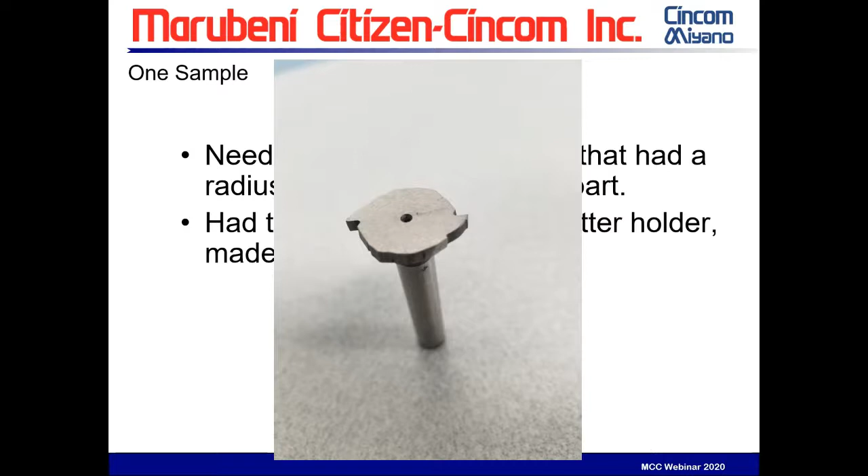Well, this was a hand ground cutter, so my young guys are like, see, it won't work. And I'm like, no, it will work. We just need a good cutter.

So I went through and started designing a cutter. I found inserts from a turning tool. Here's the part that we want to run.

And so if we look at it, we started to design up a cutter, and the first cutter, it didn't work. And then the guys again said, hey, it'll never work. No, it will work, it's just I don't know how to do it yet.

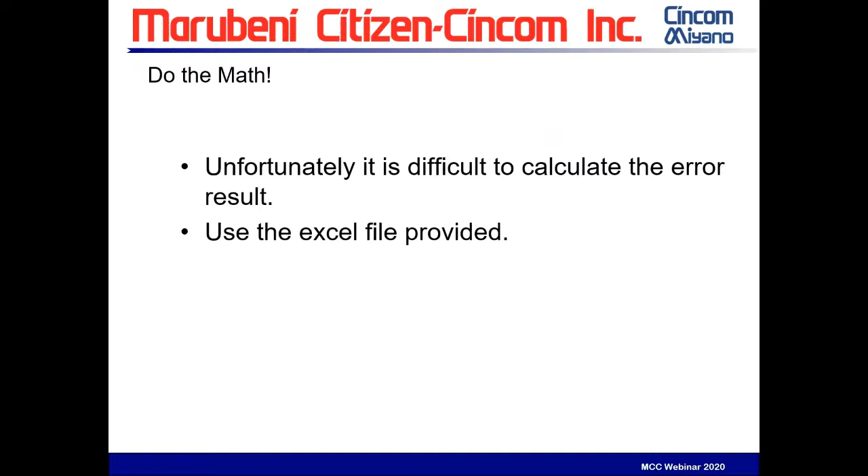I designed the cutter a little more, and what we found was this part ran beautifully, and we're going to show you in a second. But we used that same cutter to do a half-inch hex instead of a 70 thousandths, and the half-inch hex really looked bad.

So I'm trying to figure out how we can determine if polygon is good for us. I have an Excel file here that we can give anybody if you request it - your dealer should have it. If I go to our part, the part that I did was 4 flats with 2 cutters.

The flats were 70 thousandths, if you saw, and you don't know, but our cutter was 875. And if I calculate from this simple thing, this is the amount of error on the flat - look, it's 0.00002. It's virtually flat. And that's why our part looks so good.

Now, if I do the same calculation with 6 flats and a half inch, this is the next test part that we ran. You can see we had almost a 5 thousandths dish on the part, and it didn't look good. And so instantly my guys are saying, see, it won't work. And I'm like, no, we have to figure this out.

So if I do the same thing - well, what if I use 3 cutters instead of 2? Let's redesign - well, 2 thou. Well, what if I make a bigger cutter? What if I want a 1.25 inch cutter? The point is we have to understand the technology.

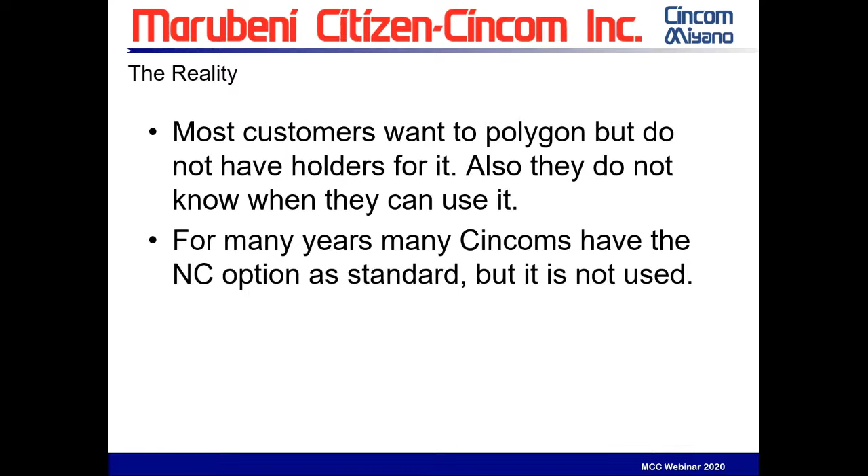The G code for Polygon has been standard for many years. Most people don't even know they have it. So the Polygon G code is standard - you just have to get a tool in there.

And so the conclusion on this whole idea is polygon milling, if used wisely, can offer great advantages in cycle time. Some experimentation may have to be done, and basically you've got to find some way to figure out how flat it will be. Well, we have a little Excel chart to help you. And maybe you've got to make your own cutter.

Today they sell 80 millimeter cutters. There's some things you can buy, but make sure you look at it many ways, and don't say if it's not available, I can't do it. Well, try to figure it out.

And with that, let's take a look at Polygon. This part was a big push. We ran it - the competition ran it in 1 minute without Polygon. We ran the part in 31 seconds with Polygon. We got an 8 machine order, and 8 and 10 more machines for different parts.

It ends up this was picky - this was the US government. The finish of the Polygon, they didn't like, so they ended up milling it in a different way. Doesn't matter, by the end we got 15, 18 machines in there.

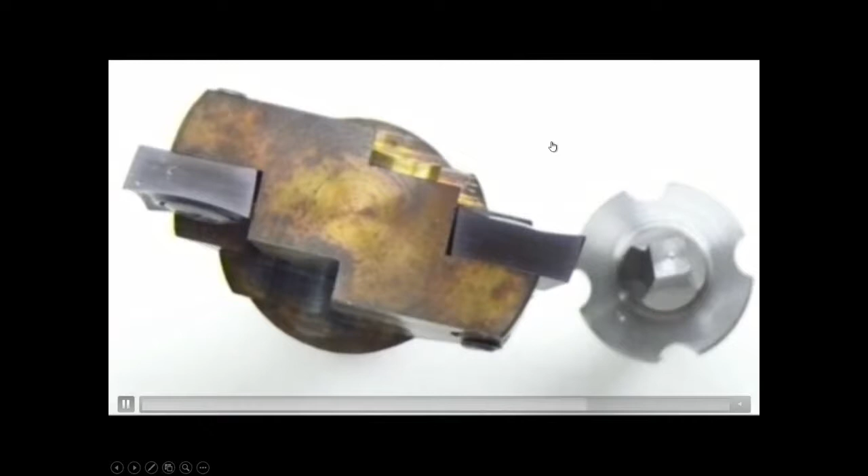So good process, I want to back that up once more so you can see it. It's a great homemade cutter. Turn on the G code - we did 2 passes, like a rough and finish.

Polygon can be phased, so this part flat is in timing with milling from the front side. You can see the flat is in line. Not all machines, not all axes can do that, but the L series can. Great things for Polygon, and Polygon is not only on Swiss, of course.

Here's a quick example of a Miyano GTY, Polygon cutter from Heimatec, insert technology from Schwanog. When you get on the larger machines, you can just buy everything. In this case, the Miyano product doing a 1-inch hex in stainless steel.

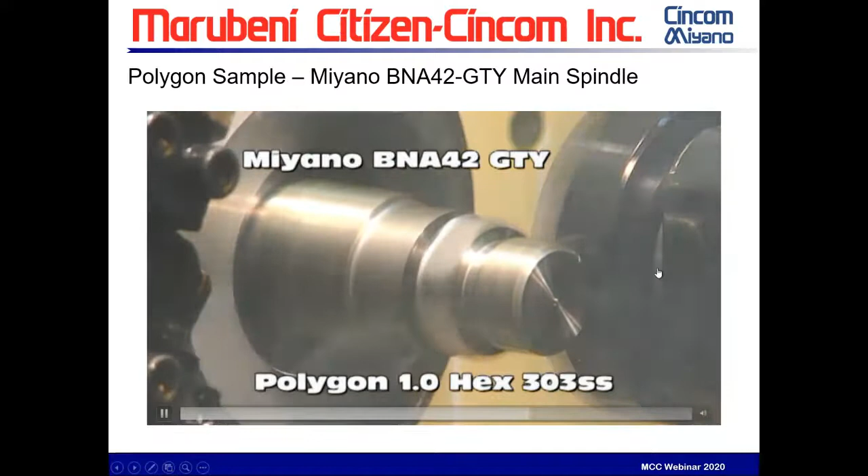Polygon machining - continue on, many things to show the awareness of what we can do. Self-creativity: here's a part we had that's 18 inches long, and it has flats on both sides of the part.

The customer gave us a very strict cycle time requirement - he wanted under a minute, under 45 seconds, I'm sorry. Everything we did on a more fancy machine that has milling on both sides was always a minute. At the time, we didn't have a Y-axis on our gang machines. Today we can put tooling in and do this on an L series.

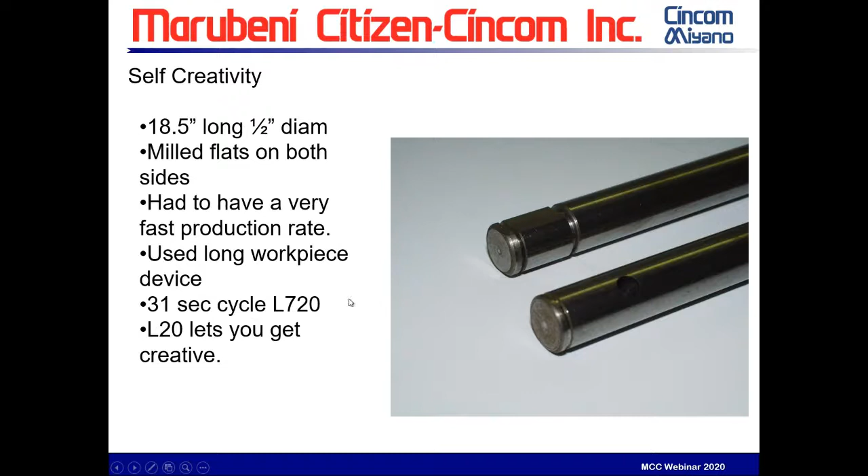But if we keep the simpler L series and think outside the box, here's what we did. It took us a couple weeks to figure this out - the distributor kept telling us, hey, can you find a faster way to machine this? It ends up being about thinking. It has nothing to do - Citizen didn't give us live tooling in the back, but we do have multiple live tools here.

If you can throw away your preconceived concepts and forget what everybody else told you - I can set this tool and this tool at the same height. So when I program this up and down, this is going to go with it. Well, I have a Z-axis and an X-axis on the subspindle. If I bring the subspindle over and in, anything I'm milling times 2. So I have a machine that's not made for milling on both spindles, that we're milling on both spindles.

We were able to get the cycle time cut in half. Here's an 18-inch long part with mills on both sides, drills, cross holes, able to run in 31 seconds with 2 rechucks. It's going to zoom in a second, so we'll run it a little bit bigger. Long workpiece device to get shafts out of the machine.

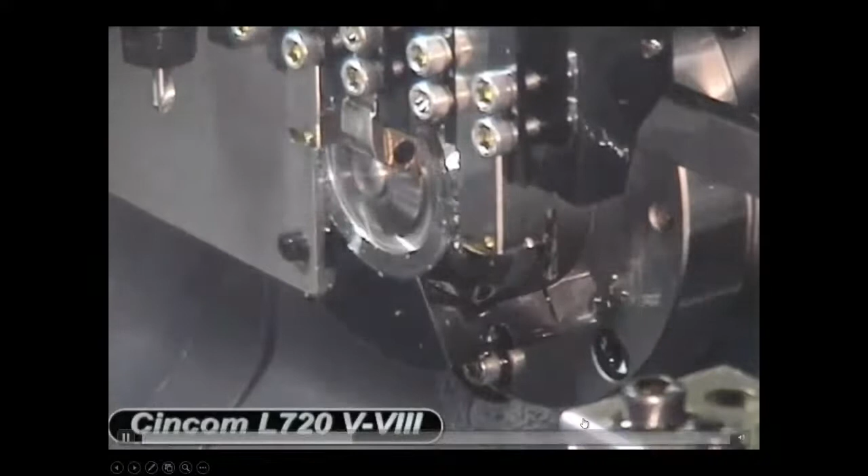Now if we blow up on it a little bit, as the back turns in grooves, the front turns in grooves, and here we simply have a mill, and we're really programming this one. This one's just sitting here, and we bring our subspindle up to it. So now we have 2 mills running simultaneously, and very low cost as far as a machine tool. All it takes is keeping an open mind - it has nothing to do with what's the G code.

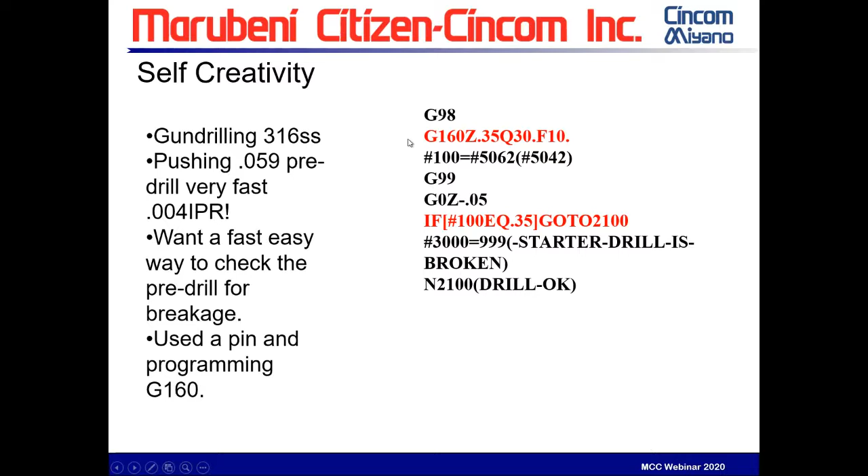So one G code says feed under torque checking, go to this position, and if you reach 30% of load, stop moving. I'm not here to teach you programming, but a macro variable records the position we're at. We can say if we made it to the position, continue; if we didn't, we can make an alarm that the drill is broken. Very simple things with our self-creativity and servo torque sensing - let's take a look.

Today, the tooling manufacturers have technology. So this is 316 stainless, it's brass for the video. And that pre-drill, they wanted us to go 4 thou per rev at a billion surface footage, however you want to do it. And we're going into a show. You guys are going into production.

If this drill breaks, the gun drill breaks, the next drill breaks, drills on the backside break because the hole's supposed to be there, and it's just a nightmare. So we got to know if this drill is broken. So I'm going to run it one more time here.

And so after that drill penetrates and does what it's supposed to do, we go and check. Did the drill break? We just pushed a pin in there. Nice and simple. Use the same technology for a cross hole.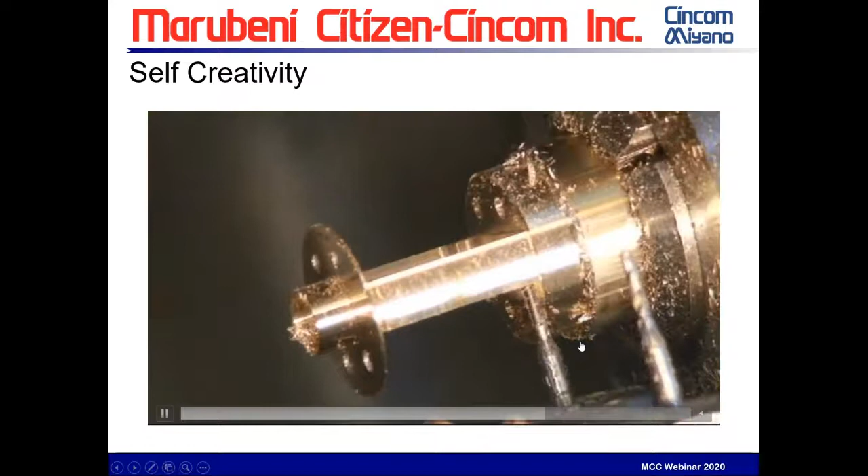Doesn't mean it's the only way. So if we drill some cross holes here, back up just a little, put a pin in. Did we hit anything? No. Move on, let the tap come in. Otherwise we got a broken tap, right?

Another feature, sometimes we do heavy milling. Here's a big mill. We're going to bring in a smaller mill for the next feature. It's going to instantly break if this mill just buries into material. So after this mill's done, before the little mill, we're going to come out, bring that same pin, and check. Is it milled? Yes, it is. Now our little 1/8 inch mill can come in.

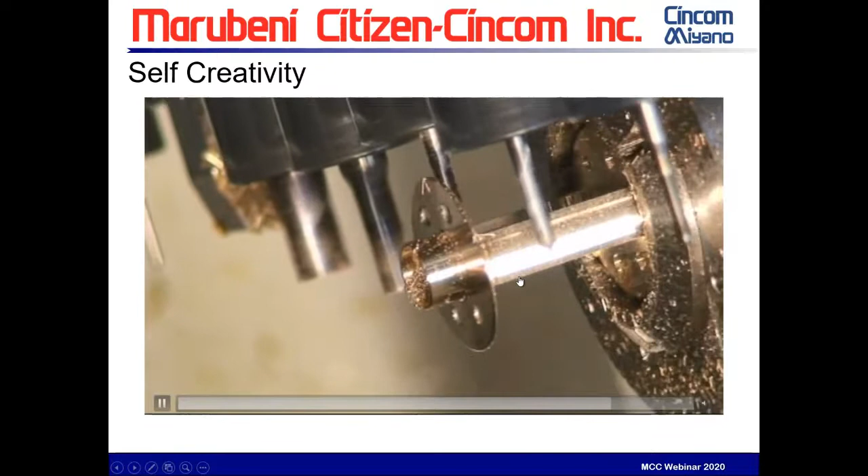Self-creativity, go to the extreme. Please don't take this, but not that we can measure with a probe and be 1/10, but here we used it for part gauging. We found easily under a thou we can measure, and with creative programming not taught here, we can actually update the offsets, and we can make a programmable diameter checker with offset capability.

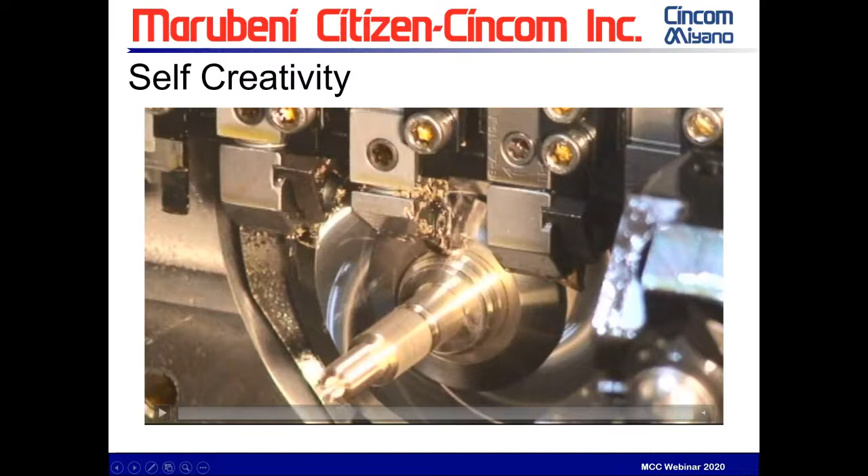Self-creativity, servo torque sensing. So now let's look at another. Everything goes into a story, and I think you'll really, this is a, I don't know, a cute story. I kind of like it.

So we had a customer that basically had a very large bundle of 875 aluminum hex bar, and whatever happened, we installed the machine, the dealer did, machine's running fine, and like a month later, all of a sudden it's blamed that the machine is bad. And so they had a 4-inch long part, had a through hole, and there was a slot about 3 inches long that had to be perpendicular to the hex flats.

And so you can very easily see when this slot is not lined up with the hex, and they needed it lined up. It wasn't 1 degree or anything, they only needed like 5 degrees. But all of a sudden, the parts were running good. A new bundle of stock came, and all of a sudden it's 8 to 10 degrees out of the slot and hex lining up.

And so instantly they all say the C-axis is broken, the C-axis is not repeating. But basically everybody blames the machine first. So I was called in and we went to look, and basically if I took the remnant from the bar feeder and put it on a surface plate, you could rock it almost 1/4 inch. This is how twisted and bent this bar stock is.

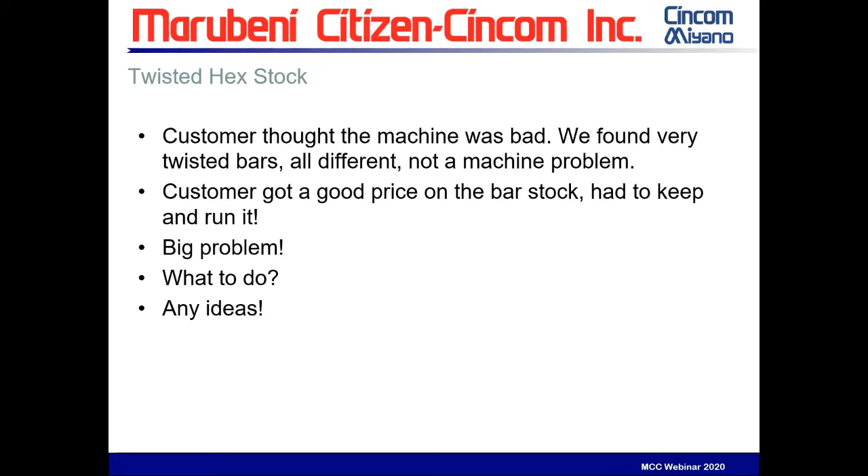It's not our machine problem, and she understood. I left, I was driving home. I probably got 1-2 exits down the freeway, and like a light bulb came on. I've been using that servo torque sensing for drill checking. What if I use that technology here? I called them back, said can I come back? And they instantly said yeah, come on, we're still here.

I asked the operator to go get me a ball nose end mill, a 187 ball nose end mill. What kind? I don't care, the round kind, you know, ball nose end mill. And we didn't mill anything, we had put it in a live tool.

We came in and did servo sensing at this crooked bar stock. Then I went to the other side, did servo sensing. I could do math from where it sensed. I could move the machine 3 or 5 or 8 degrees, whatever it needed. And so we could adjust for every part.

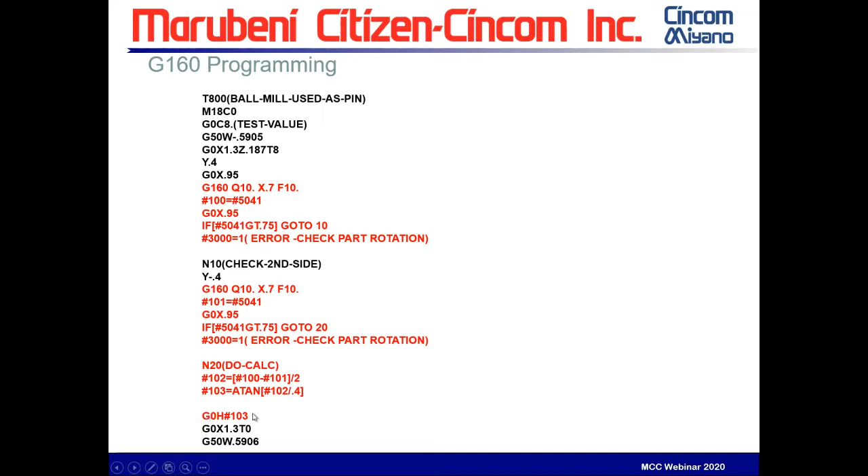Basically, here's that G code. Remember the position, move over in Y, our axis along the milling axis. Do the G code, remember the answer. Do some math, the arctan, high school trig here. We determine by math that it's 7 degrees out. We move the C-axis 7 degrees and run this part.

Basically, a good idea, thinking outside the box. They were able to run this bad bundle of bar stock, added about 2 to 3 seconds, not a big deal, and the customer was very happy.

So we got 2 questions here. The sensing, can it be done on any Citizen lathe and any axis? Those are deep questions. So any Citizen lathe, no. Most of all of our Mitsubishi, some of our Fanucs, but the Fanuc technology is a little bit different. So to make the answer simple, I'm going to say all of our Mitsubishis.

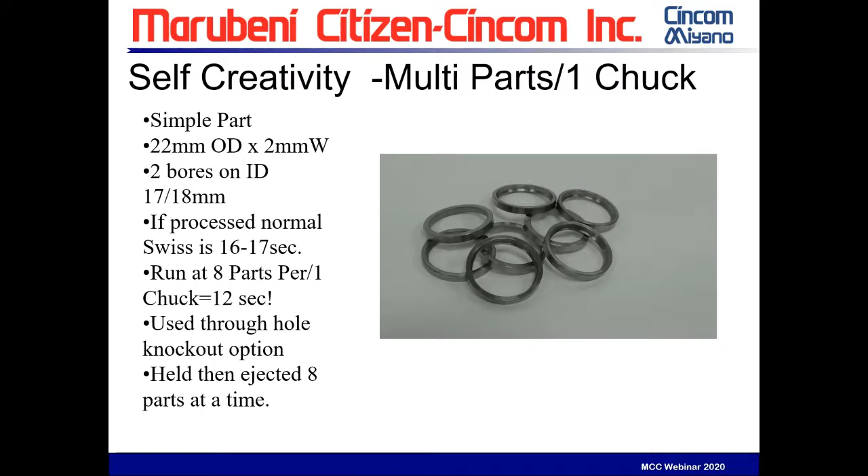We have this little ring, but we need to run it super process, super short cycle time. Most of us would never put this on a Swiss. Here's a two diameter bore, no burrs, on about a .875 diameter part. Straightforward, but we want cycle time. We got this down to 12 seconds. So how did we do that?

We utilized that through-hole knockout we already talked about. And I had the creative idea of, I'm not going to run a part and eject it. On a lot of our machines, the ejection is 7 to 8 seconds. So if I can get rid of the ejection, I can save cycle time. So what we did was we ran and held 8 parts. As we drilled for 8 parts, we ejected all 8 parts simultaneously. Let's take a look.

Thinking outside the box. The biggest thing is we do what's called multiple parts per chucking. So we're going to drill enough for 8 parts here. We just ejected 8 parts. The process is now starting and empty. As we run a part, we're going to pass it to the sub-spindle. We're going to come over and work on it. We got a bore to do.

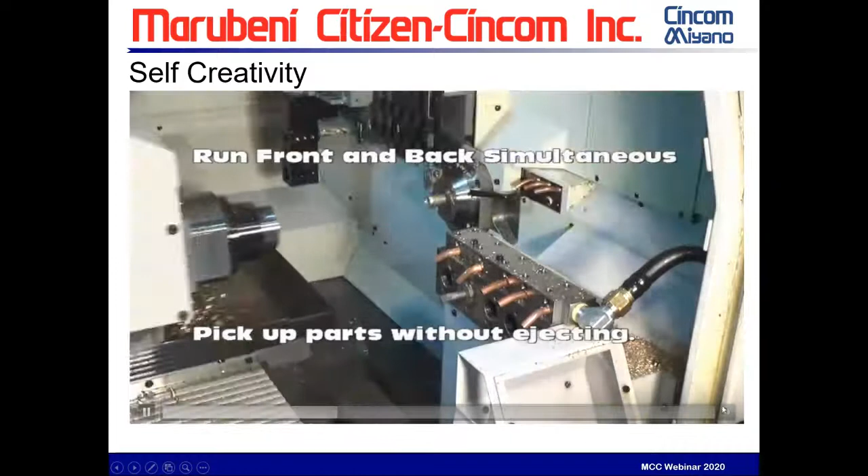Not going to eject it. We're going to run the second part, bore it, not eject it. The third part, I'm going to zoom this in so you can see we use the through hole. Basically the key is I'm not ejecting, I'm putting 8 parts in here simultaneously. And this will be a closer view. So drill enough for 8. If we had high pressure on, this would be 1 peck, there would not be pecks, but we had to turn it off for the video.

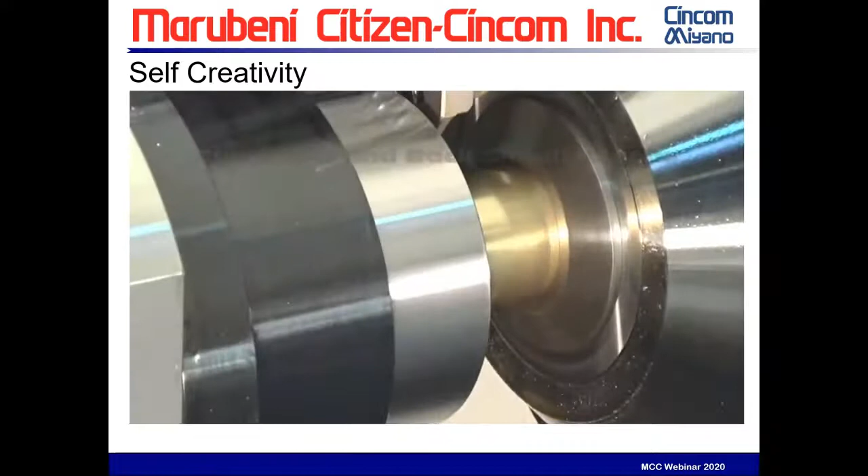And it's not brass, this is a steel that we're running, brass for the video. But there's 1 part, continue running. It's already drilled. Turn a little, bore a little, cut off. We push the first part in, grab the second part.

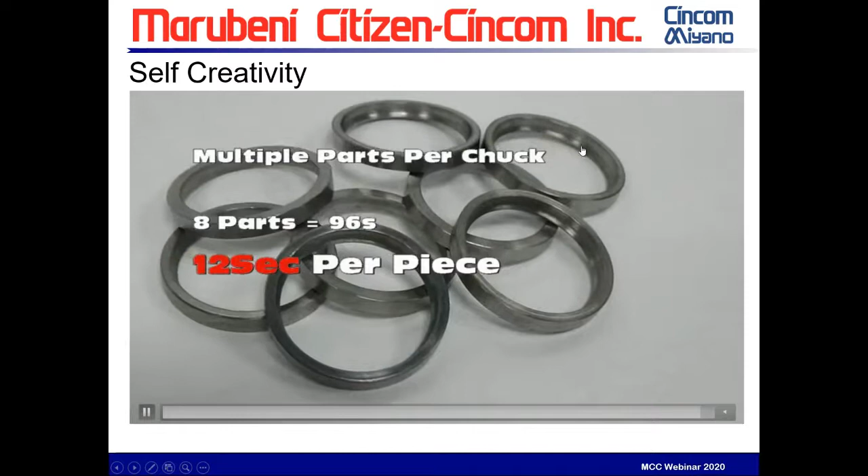Push the third part, push the fourth part. Simple, get creative. We were able to get this sucker to 12 seconds. It's not so often you get 12 seconds on a Swiss, but on an 1.25 inch Swiss, 12-second cycle time. Pretty interesting process. These were less than a thou tolerance, wasn't wide open. Had to have no burrs, so we had to bore every feature, chamfer every feature. Pretty cool self-creativity idea.

Other reasons to do this: some of the things we have long-term servicing on Swiss machines, one of the things that ends up going, if it's 6 months or a year, is the chuck fingers. If you had 12-second cycle time, you might only get 3 months out of your chuck fingers. Well, we're running 8 parts every time we utilize the chuck finger, so we're getting 8 times the life.

On a Swiss, when you use the common area of the ball screw, you're always working near the guide bushing. So if you had 1 million parts to run, you're really wearing out the first inch of the ball screw. When you use multiple parts per chucking like this, you use more of the ball screw. Some of our customers set up a part and the machine never sees another part; other customers change all the time. So we can do both, and it's just a good idea.

Lastly, most bar feeders need some kind of a dwell to make sure the signal came through to switch from pushing versus synchronize. In this case, if we run 8 parts in 1 chucking, we only need 1 little dwell for 8 cycles. So that's saved, could be 0.8 seconds, could be almost 7-8 seconds savings across 8 parts. And it's easy to program.

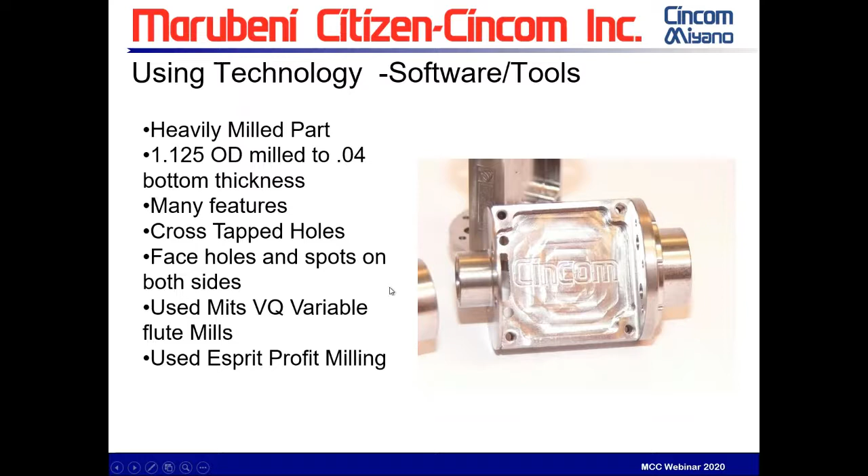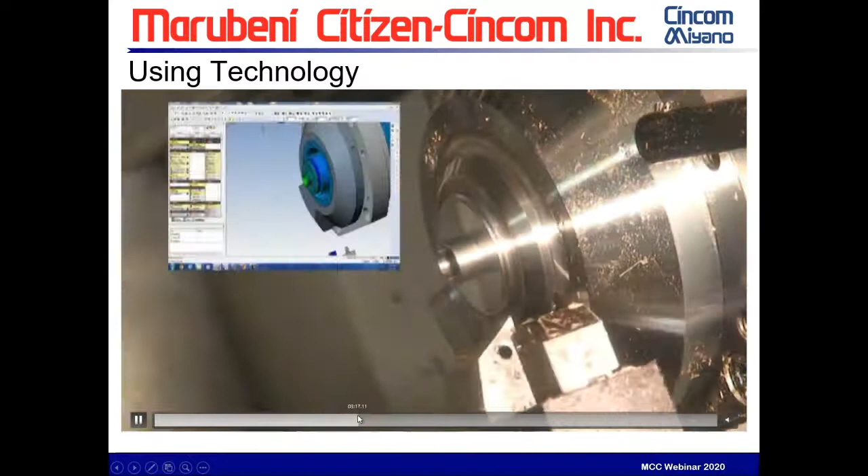Here we're going to get our superimpose going—a little bit of bore. Here we go, while we're rough turning and finish turning, we get superimpose going. But now watch these end mills. I'm going to try to pause it here.

Hey Brian, I think you're cutting out there over the video. Oh okay, I'll stop it for a second.

So as these mills entered, they went in at about 20 inches a minute in a helical entry. But once they got full in, they're .550 deep, and we're going 68 inches a minute, full depth.

With the tooling path of a CAM system, in this case Esprit, called profit milling, and I wouldn't say a super special end mill, but a good end mill with helical design flutes that reduce vibration and increase rigidity.

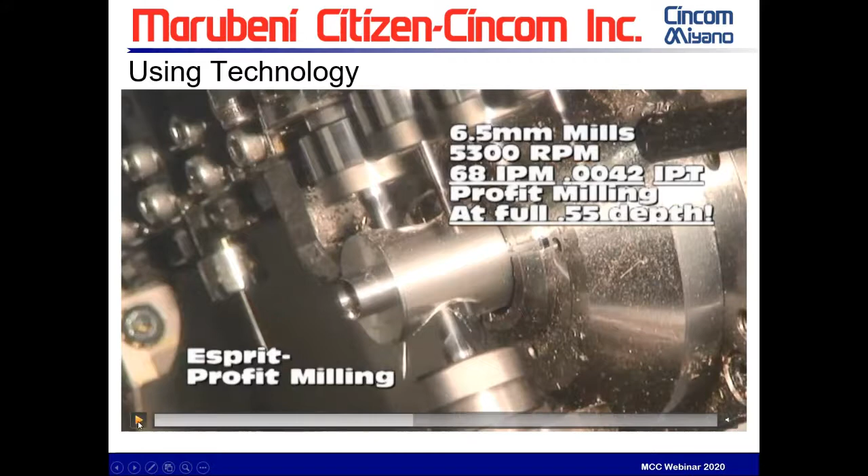So I'm going to say learning technology, learning end mills, learning your CAM softwares. It doesn't have to be Esprit, there are others. There's many things we can do to get better cutting, better cycle time, better tool life.

Very interesting things. So today we talked about many things. It's at a high rate, not really a teaching, but just a vision on what some things we've done. And you can see that superimposition has lots of interesting abilities.

Simple supports, utilizing different kinds of collets, looking at some of the features that Citizen has, Citizen-Cincom, that are simple programming. Got very creative with Polygon and gave you some ideas on how you can utilize Polygon.

Servo sensing opens up a whole other world. We checked the guy's bar stock instead of getting rid of his whole bundle. So basically, thinking of having an open mind.

So as we look at the future and you look at your parts, you can call and we can help you with a G code. But it's hard to call and help with an idea. You need to have the ideas and we can help you execute them.